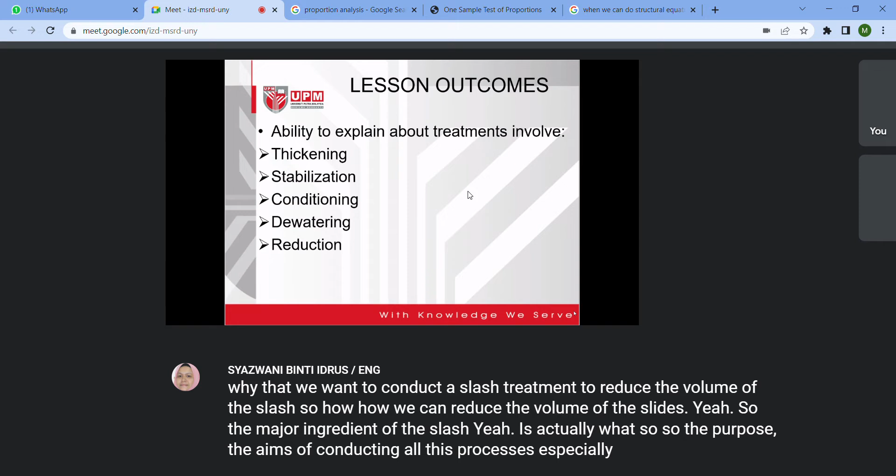So the spirit of conducting the sludge treatment is to reduce the volume of the sludge. That is the reason why we want to conduct a sludge treatment, to reduce the volume of the sludge. So how can we reduce the volume of the sludge? The major ingredient of the sludge is actually water. So the aims of conducting all these processes, especially thickening and dewatering, are to remove the moisture content, to remove water from the sludge, so that we can reduce the volume of the sludge.

Why do we need to reduce the volume of the sludge? As mentioned by Mr. Khairil during our visit, they have to pay for the sludge treatment. The water treatment operator has to pay for the sludge disposal. So that's why they would like to avoid producing a large volume of sludge. So to produce a very little amount of sludge, it has to go through a few processes. The major one and the first one is the thickening process.

Okay, let's watch the video. I think this is a very short video, and not really important because you have done your site visit, so you should be able to explain better regarding the sludge treatment.

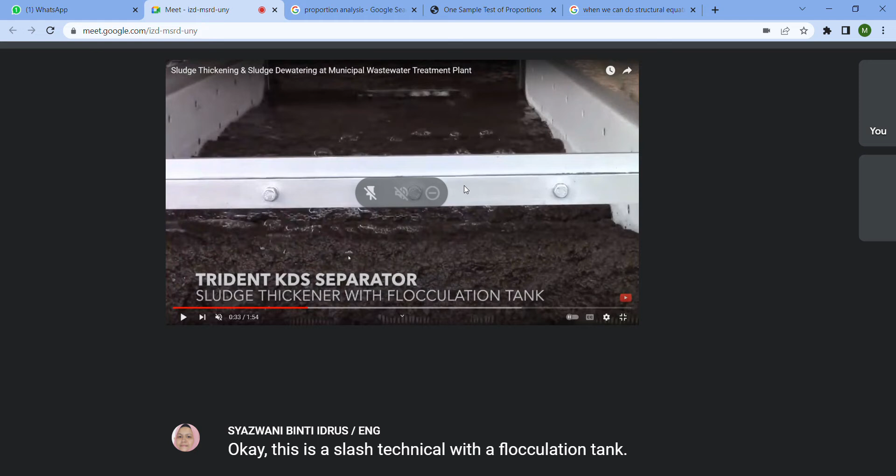Okay, this is a sludge thickener with a flocculation tank. So during sludge treatment, another set of polymer will be added. The polymer is a binding agent, to separate the sludge and water. It will bind the sludge.

Okay, this is after the dewatering process. So sludge which has been dewatered is known as sludge cake. So the major component of the sludge is definitely the solid from the waste, as well as the activated carbon, because activated carbon is a part of the treatment, and also the polymer which has been added

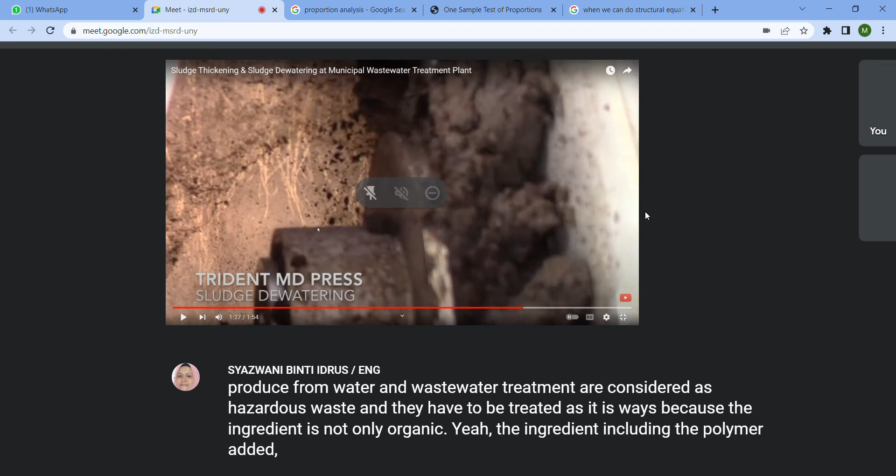earlier. So this is the reason why the sludge produced from water and wastewater treatment is considered as hazardous waste. They have to be treated as hazardous waste because the ingredient is not only organic. The ingredients include the polymer added as well as the activated carbon. Okay.

So the sludge cake is normally very low in terms of moisture content, very low in terms of volatile solid, and very high in terms of the total solid. Sorry.

No, the same one. You see? Not the same one. Different.

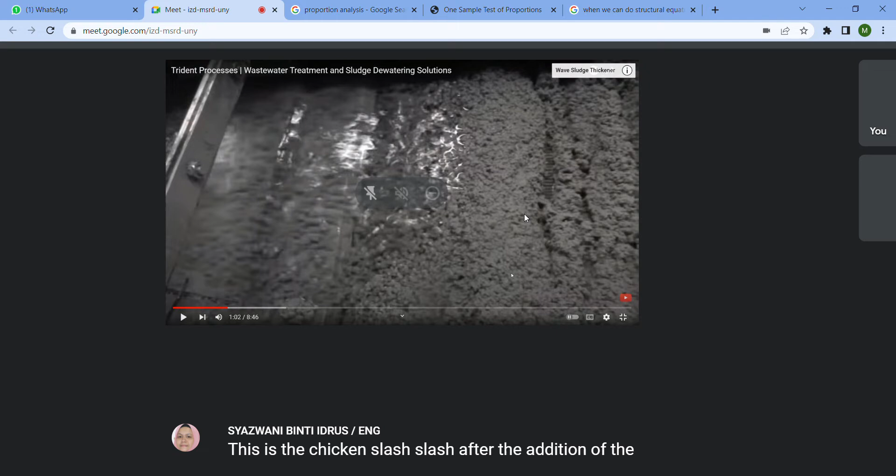Okay. This is the thickened sludge. Sludge after addition of the polymer, and now they are separated from water. Now they are discharging the dewatered sludge. The sludge has no longer, or very low, water level.

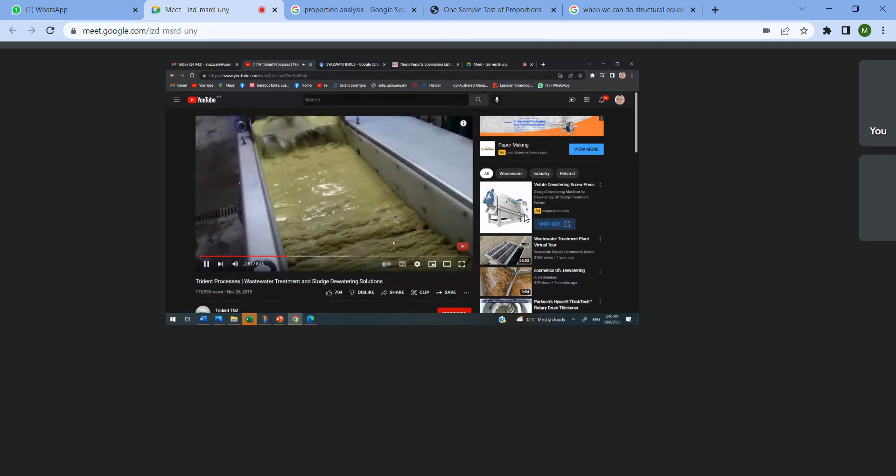So these are the addition. And these are the sludge cake. Yeah. I think in the water treatment plant that we visited last week, they do have this one. And we have this one after the sludge. For a water treatment plant, the production of sludge is not much, but if we are talking about a wastewater treatment plant, it is very significant.

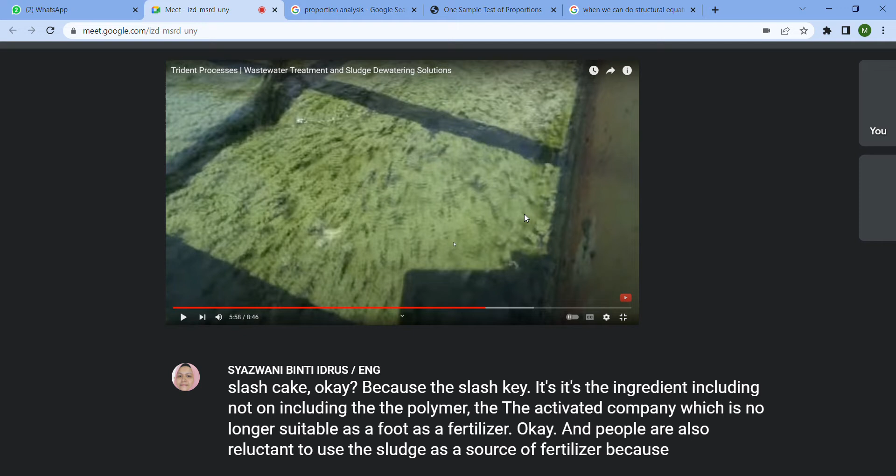Sometimes the wastewater treatment operators have no idea what to do with the sludge cake. Okay, because the sludge cake's ingredients include the polymer and the activated carbon, so it is no longer suitable as a fertilizer. And people are also reluctant to use the sludge as a source of fertilizer because it is human waste. So we can use it for non-crop plants, especially for gardening purposes, but not crop plants.

Right. Let's go to our lecture today. It's on sludge treatment, but a very quick one, because it's only a revision. So sludge treatment processes are concerned with separating the large amount of water. This is why this step is an extremely important stage. It starts with the thickening process, which is separating as much water as possible, whether by gravity or flotation. There are two methods. If by gravity, it works exactly like a sedimentation tank.

But if through flotation, it works exactly like dissolved air flotation, where we inject the air and it allows the sludge to float on the surface of the water. So exactly like the one that we saw during our visit, dissolved air flotation, where there is sludge which is stagnant on the surface of the water. That is known as the flotation method. If by gravity, the sludge will settle to the bottom part of the tank. This one is a very conventional system.

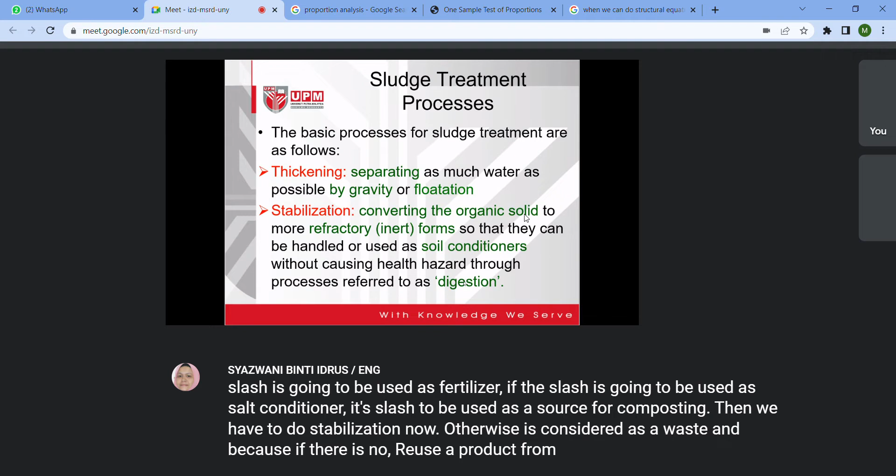Because if there is no reuse product from this treatment, which is the sludge itself, therefore there is no need to conduct the stabilization process, because this process is only required if we are to reuse the treated sludge. The stabilization process includes anaerobic digestion.

Okay, next one is conditioning. Conditioning is the addition of chemicals, including the polymer. This is another version of separating water and the sludge. Just now, if you go back to the first step, which is thickening, this is through mechanical as well as physical process, how the sludge can be separated from water.

And the third process is conditioning. This is where further separation will occur due to the addition of the polymer. Next is the dewatering process, separating water by subjecting the sludge to vacuum, pressure, or drying. And the final one is the reduction. It's converting the solid to a stable form by wet oxidation or incineration.

We don't have any of this. Normally after dewatering, the sludge is ready to be sent to the landfill. Okay, these are the steps that we have discussed earlier.

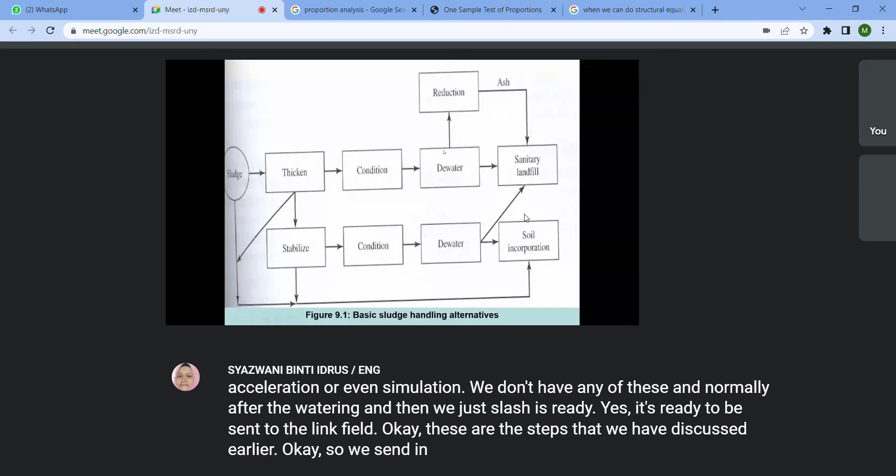So in this country, normally we send the sludge to the specific landfill which handles hazardous waste. So the cost will be paid by the water or wastewater treatment operator. If the cost is increased, then the consumer has to pay for the service. That's why they have been thinking of any technology that can reduce the sludge production.

What is actually the constituent of the sludge? First is the grit, which is the sand or the broken glass, the nuts, the bolts, and other dense material. This is from the grit chamber. Second one is the primary or raw sludge from the primary tank. Grit is from the preliminary tank. Okay. And next is secondary sludge.

So this is the major contributor to the sludge which has to be treated, because in a wastewater treatment plant we have waste activated sludge from the conventional activated sludge process. So these are the major contributors to the sludge production.

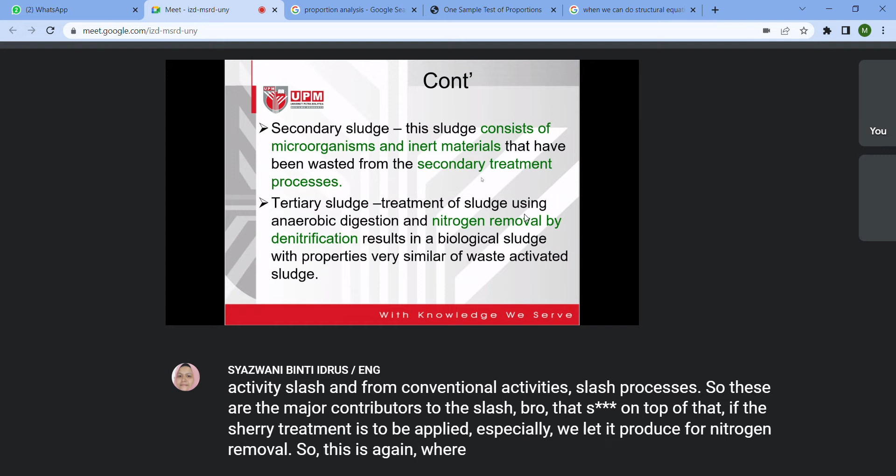On top of that, if tertiary treatment is to be applied, especially for nitrogen removal, this is again where sludge can be produced from the anaerobic digestion process, and different types of digesters will produce higher or lesser volumes of sludge. For example, if we employ the stirred tank reactor, it will produce a large volume of sludge. But if we employ the upflow anaerobic sludge blanket reactor, the sludge will be retained within the reactor, which reduces the sludge production from the system.

Okay, let's see. The thickening process is usually accomplished in two ways, through flotation or gravity. As I mentioned just now, the goal of this treatment is to remove as much water as possible before it goes through the next process. Basically, this is a low cost means of reducing the sludge volume, and it works very well.

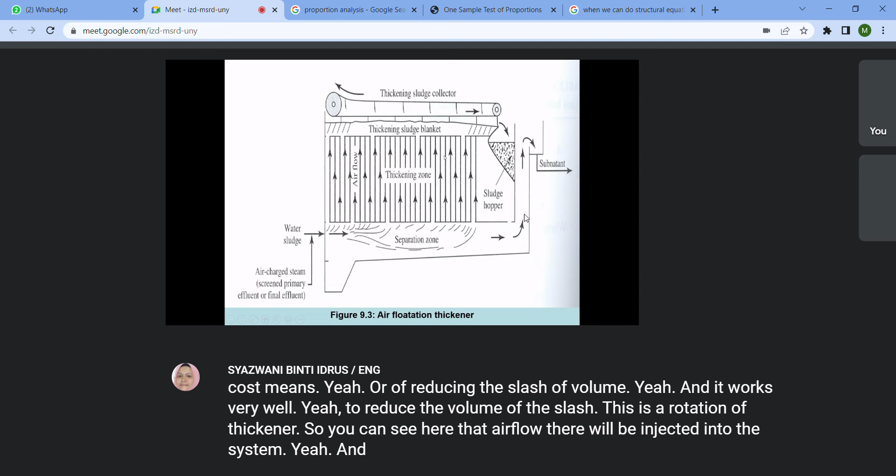This is an air flotation thickener. You can see here that the airflow is injected into the system, and the thickened sludge is collected on the surface of the system, the thickened sludge blanket. Normally we remove this using scrapers. This is exactly what we have seen before during the visit.

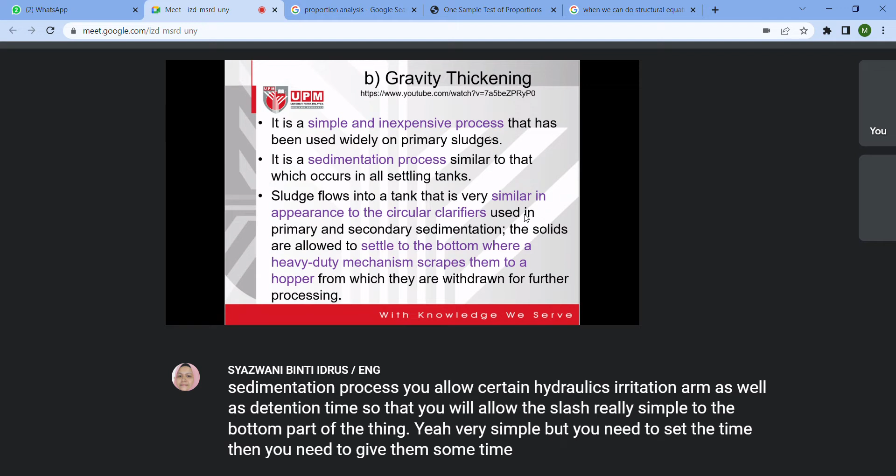Next is gravity thickening. This is a simple and inexpensive process. It uses the concept of the sedimentation process. You allow a certain hydraulic retention time as well as detention time, so that the sludge will settle to the bottom part of the tank. Very simple, but you need to set the time. You need to give it some time. Otherwise, the sludge will not settle properly to the bottom of the tank.

Okay. Next is the stabilization process. The principal purpose of sludge stabilization is to break down the organic solids biochemically. As I mentioned just now, stabilization is not very common in all water and wastewater treatment plants. Even though in this country we do have a few wastewater treatment plants that have a stabilization process, the one in Bunus, Wangsa, as well as the one in Lembah Pantai. The rest of the treatment plants send to the landfill, therefore no stabilization process is conducted. So the stabilization process can be conducted using two methods.

The first one is aerobic digestion, by injecting the air into the sludge, and the second one is anaerobic digestion, where they have a chamber without any oxygen inside. So this is the very common method for the sludge treatment, where they produce methane from the anaerobic digestion.

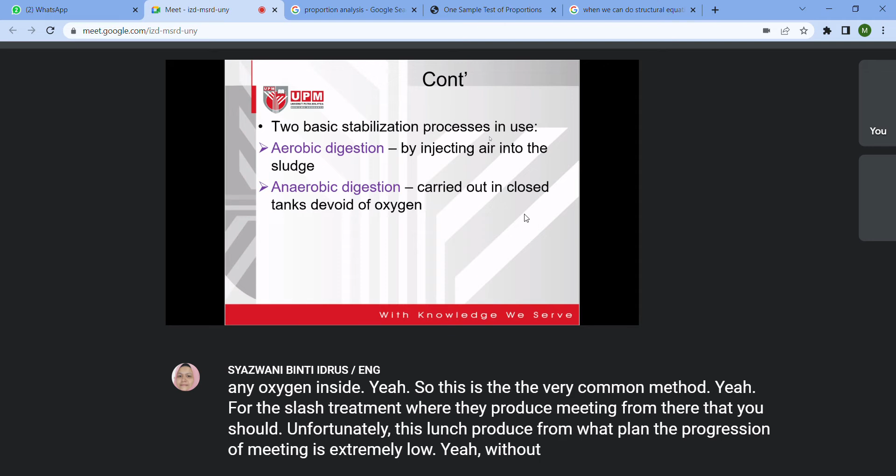Unfortunately, for the sludge produced from water and wastewater treatment plants, the production of methane is extremely low without any addition of other substrate. If we would like to promote more methane production, then we have to add other substrates, including food waste, because recently they have added food waste into the digester that contains the sludge from the wastewater treatment plant, to enhance the potential of the sludge cake produced, so that they can use the energy, because methane can be converted into electricity.

So basically, these are the standard rate for anaerobic digester. An anaerobic digester is a fully closed system without any oxygen. It requires airspace, supernatant, and at the bottom part normally will be the sludge. So employing this system, you will use a low amount of energy. However, you need to avoid any extreme loading rate. You have to control the volume of the sludge to be treated.

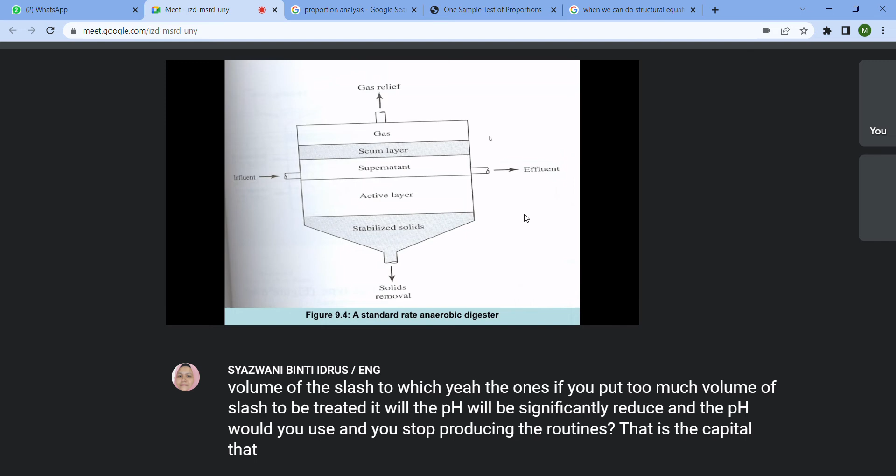Otherwise, if you put too much volume of sludge to be treated, the pH will be significantly reduced, and it will stop producing the methane. That is the indicator that the microbes within the tank are about to die. So once you reach a pH of 4, that is the sign of severe inhibition.

Okay. Sludge conditioning. Next, after stabilization is conditioning. This is where the polymer or the coagulants are added, including the PAC. The role of polyaluminum chloride is as a binding agent, so that it can clump all the sludge and separate it from water. So chemical coagulants act to clump the solids, so they can be easily separated from water.

On top of that, sludge conditioning can also be conducted using heat treatment, where the recommended temperature is a maximum of 230 degrees Celsius and a pressure of 2000. Definitely, we have to apply pressure, otherwise we cannot reach 230 degrees Celsius. Under this condition, water that is bound up in the solids is released. So this is another method to further improve the removal of moisture content.

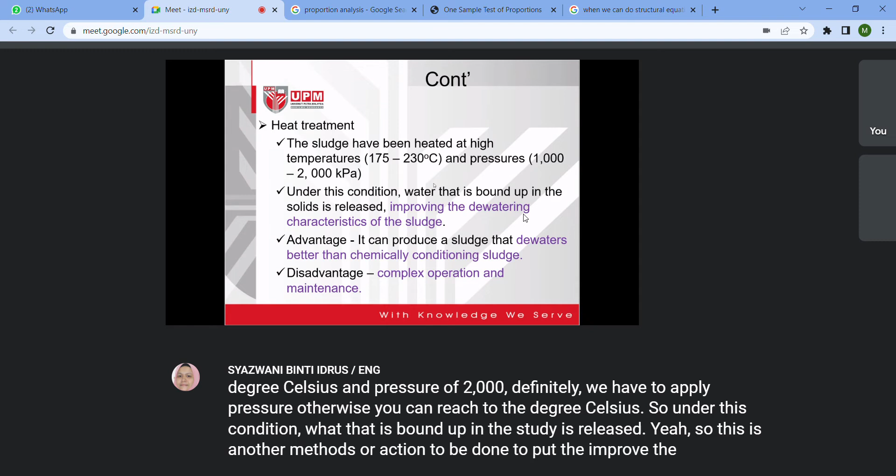Okay, the advantage is it can produce sludge that dewaters better than chemically conditioned sludge. So this is the option. The one that we normally practice in this country is sludge conditioning using chemical conditioning. On top of that, heat treatment can also be used as a conditioning process. The advantage is it can produce a sludge that dewaters better than chemically conditioned sludge, because we apply heat. The disadvantage is complex operation and maintenance.

Okay, next, sludge dewatering. There are three methods involved. The first one is the sludge drying bed. This is the one that we have seen before, and it is normally used by small plants because of the simplicity of operation and maintenance. It can be built without any provision for mechanical sludge removal and roof. So this is always selected as the dewatering method.

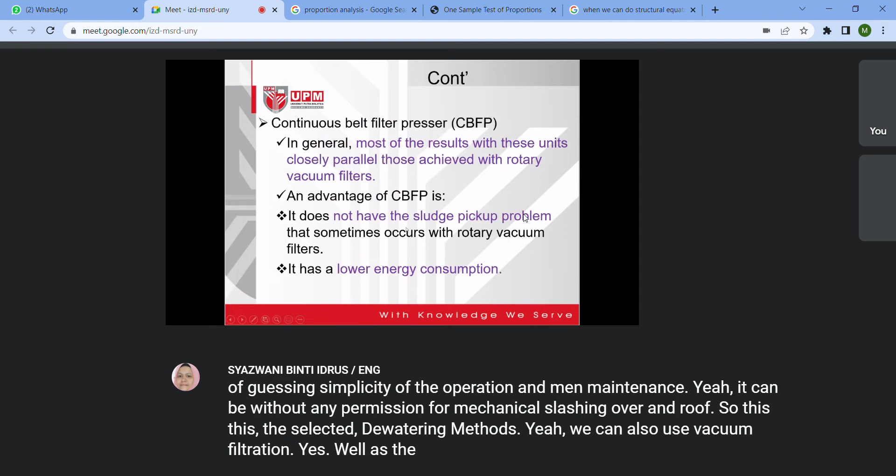On top of that, we can also use vacuum filtration, as well as the belt filter press. I think I do have one video that I can share with you regarding the belt press. Okay, belt filter press. Okay, watch one video on the belt filter press.

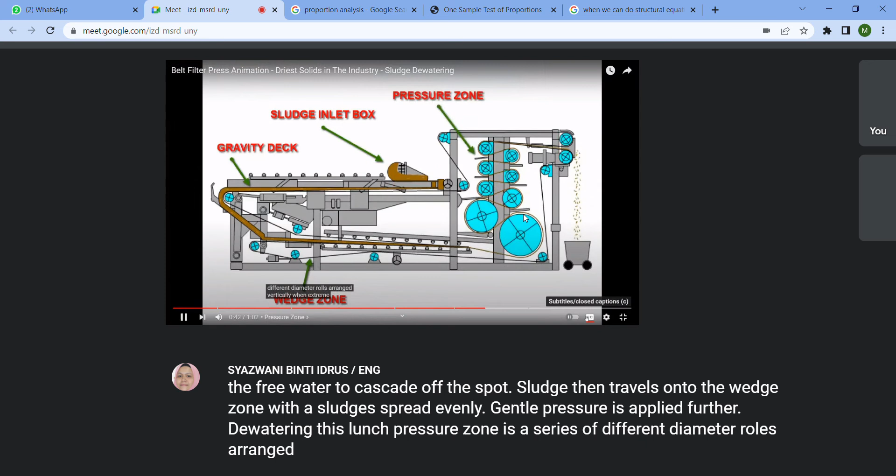Wet sludge enters the press through a sludge inlet box, where it is gently dispersed and spread evenly. Sludge is spread evenly along the gravity deck by a sludge leveling bar and passes through a series of plows, aligning the sludge into rows, allowing the free water to cascade off the sludge through the belt. Sludge then travels onto the wedge zone, where the sludge is spread evenly and gentle pressure is applied, further dewatering the sludge. The pressure zone is a series of different diameter rolls arranged vertically where extreme pressure is applied, allowing for maximum dewatering.

The belts are finally separated at the cake discharge zone, and scraper blades are used to remove the dried cake from the belts.

Okay, that is the belt filter press. The advantages are it does not have the sludge pickup problem and lower energy consumption. Next is the reduction process.

If sludge used as a soil conditioner is not practical, we use reduction. So if we have nothing to do with the sludge, we have no idea what product can be developed after the sludge treatment, then we can use incineration. But it's not common. Normally we send the treated sludge to the landfill.

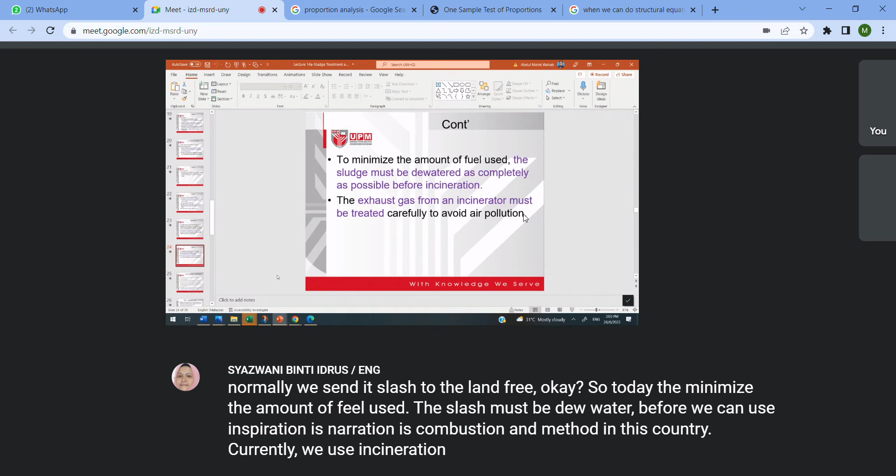So to minimize the amount of fuel used, the sludge must be dewatered before we can use it in the incineration. Incineration is a combustion method; in this country currently we use incineration if we are to deal with toxic waste or clinical waste, mostly the clinical waste.

So the thing with incineration is the system can completely turn any kind of waste into ash, because we are going to burn them at 1000 degrees Celsius. But there is another issue in preparing the waste before it can be burned in the incinerator. The major problem is to reduce the moisture content, otherwise it will not work well. It will not turn the waste into ash.

On top of that, most sludge contains high concentrations of sulfate and phosphate, all those negative ions. These negative ions can turn into acidic gas. So when they turn into acidic gas during combustion, it can cause corrosion to the incinerator itself. So this is another issue if we employ an incinerator.

Okay, sludge disposal, as we have seen before, twice a week or once a week, the lorry, the truck will come and pick up and send it to the landfill. These are the common methods. Okay, all right. Next, example one. We have three examples today. Example one, lecture 14.

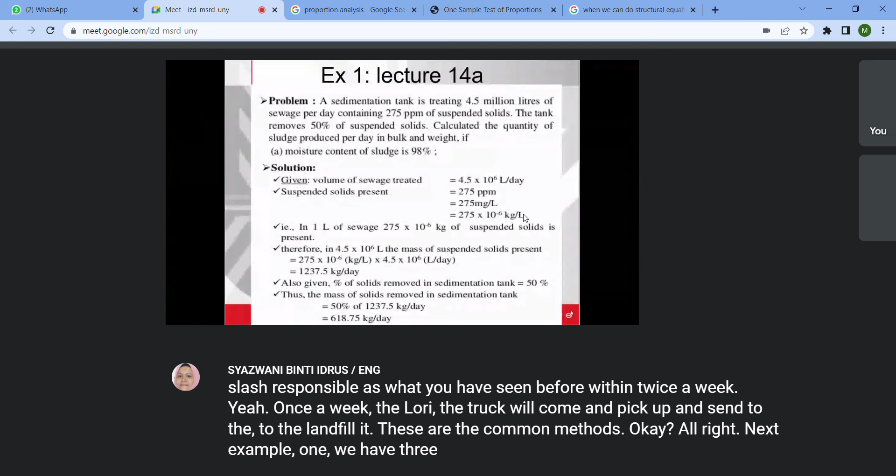A sedimentation tank is treating about 4.5 million liters of sewage per day, containing about 275 ppm of suspended solids. The tank removes 50% of the suspended solids. Calculate the quantity of the sludge produced per day in bulk and weight. You are given the information that the moisture content of the sludge is 98%.

The sludge itself, can you just imagine, 98% is water. If we are talking about 100 kg of sludge, 98 kg is water and only 2 kg is solid. That's why the treatment is extremely important, because this treatment can significantly reduce the volume of the produced sludge.

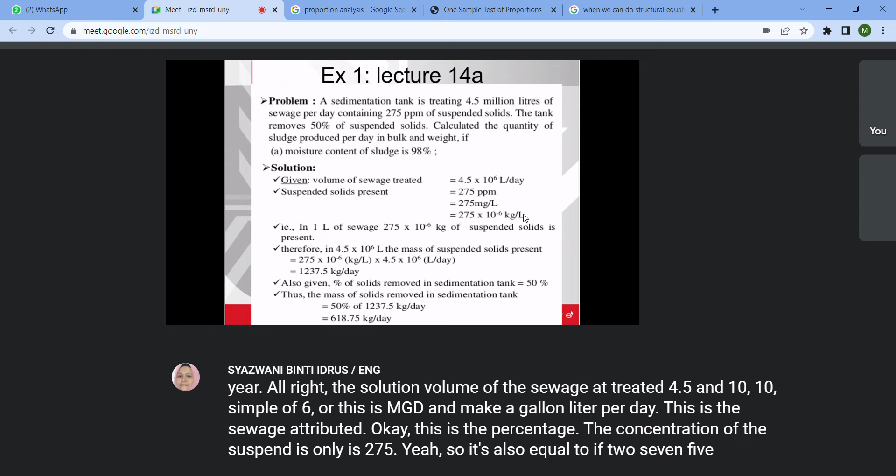Alright, the solution: volume of the sewage treated is 4.5 times 10 to the power of 6 liters per day, or megaliters per day. This is the sewage to be treated. The concentration of the suspended solids is 275 ppm, which equals 275 milligrams per liter, which is also equivalent to 275 times 10 to the power of minus 6

kilograms per liter. In 1 liter of sewage, 275 times 10 to the power of minus 6 kg of suspended solid is present. Therefore, we are treating about 4.5 megaliters of sewage. So we would like to know the suspended solid available in the sewage to be treated: 275 times 10 to the power of minus 6 times 4.5 times 10 to the power of 6, which is the sewage. And you will get 1237.5 kg per day.

This is the mass of the suspended solid available in the sewage to be treated, because the flow rate of the sewage is 4.5 megaliters per day. And you're also given the percentage of solids removed in the sedimentation tank. We know that sludge treatment is the final barrier. For this reason, we have to always consider a certain rate of removal.

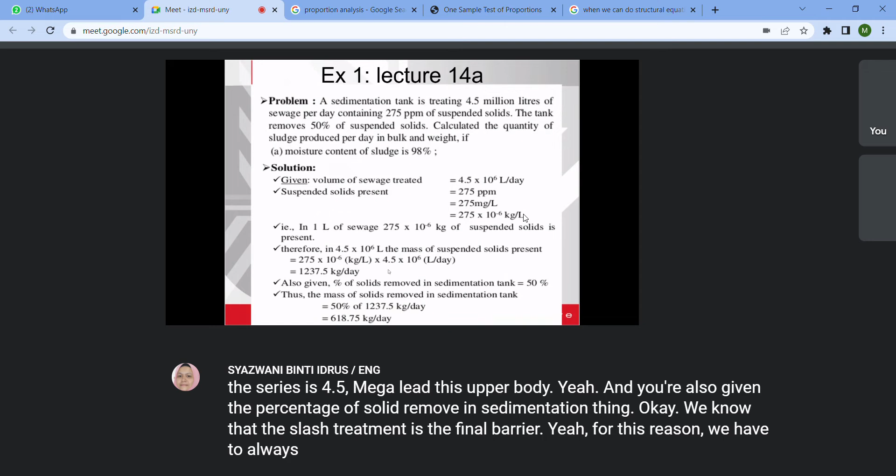So in this case, you were informed that the percentage of solid removal in the sedimentation tank is about 50%. So we know that the sludge required to be treated is only half of the suspended solid calculated earlier, in this case about 618 kg per day. You know that the moisture content of the sludge given to you is about 98%.

Okay, now we have to make some assumption. Let's use 100 kg because it's easier. Let's say that you have 100 kg of wet sludge, 100 kg of untreated sludge.

Wet sludge is untreated sludge, and the moisture content is 98%. For this reason, we can conclude that 2 kg of the sludge is solid, and 98 kg of the sludge is water, because the moisture content is about 98%.

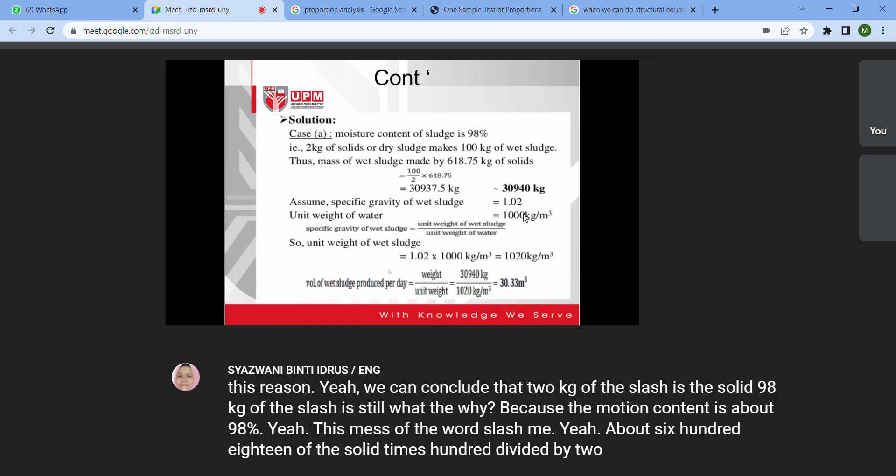This mass of wet sludge is calculated as the mass of solid, 618, times 100 divided by 2. This is used to calculate the mass of wet sludge.

Assume the specific gravity of the wet sludge equals 1.02, and the unit weight of water is always 1000 kg per meter cube. So you need to calculate the unit weight of the wet sludge.

Unit weight of the wet sludge equals the specific gravity of the wet sludge times the unit weight of water, in this case 1.02 times 1000. The 1.02 is the specific gravity of the wet sludge, or the untreated sludge. So the unit weight is 1020.

Then the volume of the wet sludge produced per day, you have to divide the weight by the unit weight. The mass, which is now the weight of the wet sludge, is about 30,900 divided by the unit weight, which is 1020 kg per meter cube, and you get the volume of the wet sludge produced per day, about 30 meter cube.

In the sludge digestion process, normally the indicators we have to monitor during sludge digestion include the pH, the biogas production, the volatile solid removal, the COD removal, as well as the alkalinity. These are the major indicators or parameters that can tell us the process performance.

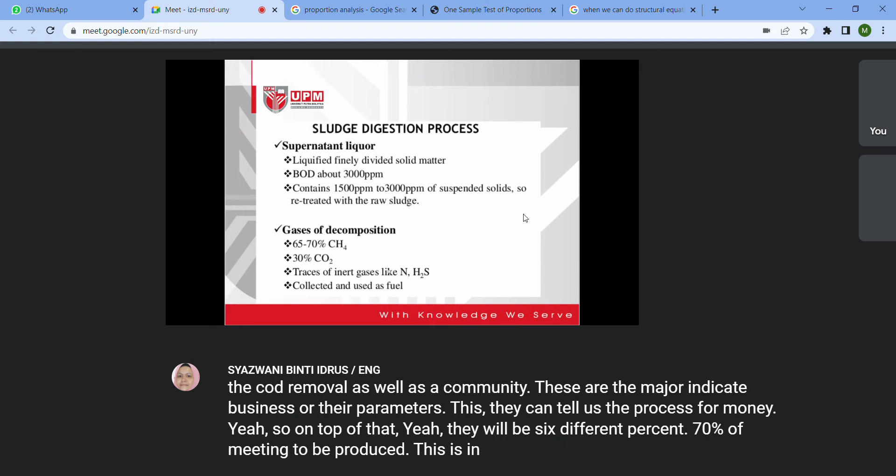On top of that, there will be 65% to 70% methane produced, in terms of composition. You can get the lowest of 50, but normally 62 is always the best number. Many studies have reported the percentage of methane produced from their system is about 62%.

There are two methods if you employ anaerobic digestion, two conditions. The first is known as thermophilic temperature, which is about 40 to 60. We can apply this method because it can produce higher biogas production.

Unfortunately, if your sample is very fragile in terms of acidification, for example like food waste, thermophilic might not be a good choice, because the system can inhibit very quickly and fail very quickly. So always use the mesophilic temperature, which is around 25 to 40. Normally we set around 35 to 38 degrees Celsius.

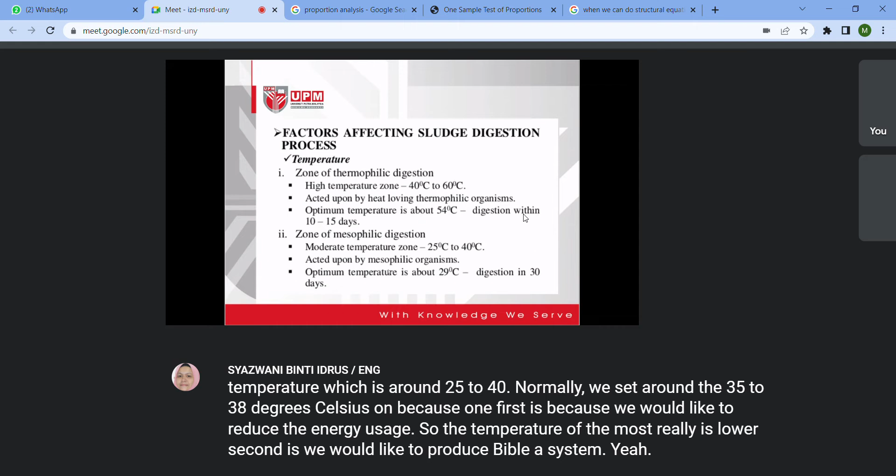Why? First, because we would like to reduce energy usage, so the temperature of mesophilic is lower. Second, we would like to produce a stable system. We are not aiming to produce very high biogas production only to end up having a failed reactor.

We have overloaded the system by putting too much waste, or a sudden admission of new types of waste. This causes a shock, as well as over-withdrawal of the digested sludge. Why is this related? Because in digested sludge, there is a certain population of microorganisms. If you take out so much sludge, you will end up having a system with a low population of microbes.

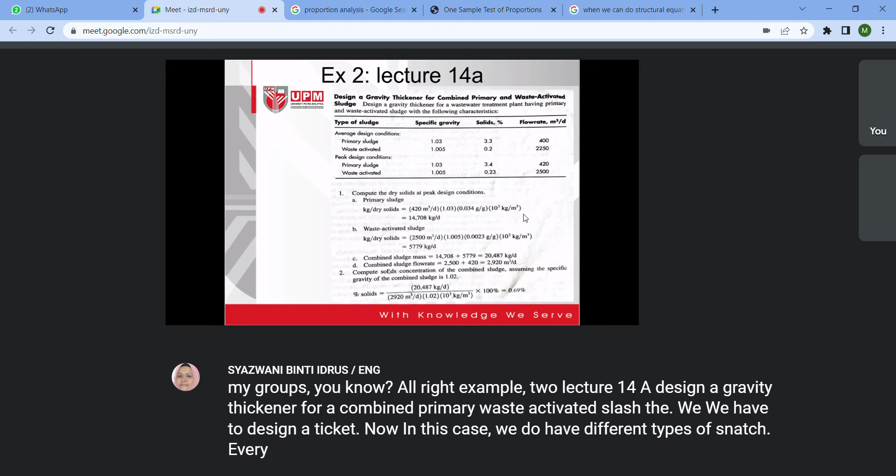Example 2, lecture 14A: design a gravity thickener for a combined primary and waste activated sludge. We are to design a thickener. In this case, we have different types of sludge—average design conditions for primary sludge and waste activated sludge. Primary sludge is from primary treatment, while waste activated sludge is processed from secondary treatment. The specific gravity is given, as well as the percentage of solid and the flow rate.

Compute the dry solid at peak design condition. Please bear in mind, in this case, we have to consider both peak design and average design.

It's not responding. The audio is not responding. Maybe I have to close it. Let me deactivate the hand tools.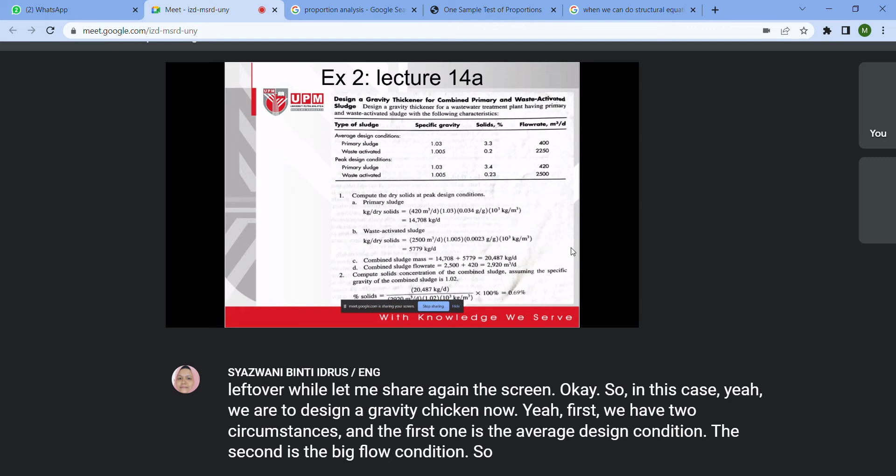Okay, so in this case, we are to design a gravity thickener. First, we have two circumstances: the average design condition and the peak flow condition. So compute the dry solid at peak design condition.

For the primary sludge, we know that the flow rate is 420, given in the final column. Then times with the specific gravity, times with the percentage of solid, then you will get kg per day. You will do the same for the waste activated sludge, and you will get the dry solid at peak design condition for both sludges, from waste activated from the secondary treatment as well as the primary treatment.

So combined sludge mass is equal to 14,708 plus 5,779, so you will get the sludge mass in kg. And combined sludge flow rate: the flow rate is given in the table, which is 2,500 plus 420.

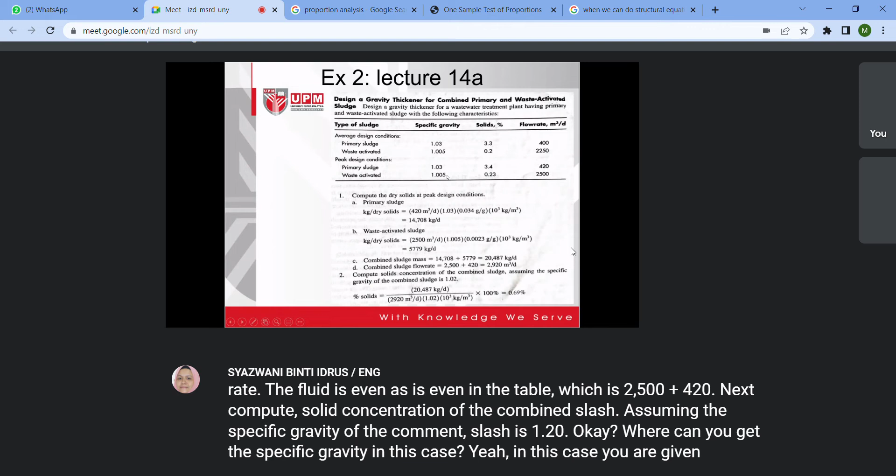Next, compute solid concentration of the combined sludge, assuming the specific gravity of the combined sludge is 1.02. Where can you get the specific gravity? In this case, you are given the specific gravity for the sludge.

For the primary sludge it is 1.03, and the waste activated sludge is 1.005. My recommendation is, if you are to calculate for the combined sludge, then get the average of these two values: 1.03 plus 1.005. So in this case, the combined sludge specific gravity is equal to 1.02.

So you can calculate the percentage of solid. In this case it is around 0.69. This was calculated earlier, this is the specific gravity of the combined sludge.

Next, compute the surface area based on the solid loading rate, because the solid concentration is between 0.5 and 1.5%. Select a solid loading rate of 50.

How to select this value and where to find it? You have to refer to Table 14-19. In this case, we are designing for waste activated sludge and primary sludge, so we are referring to the third row.

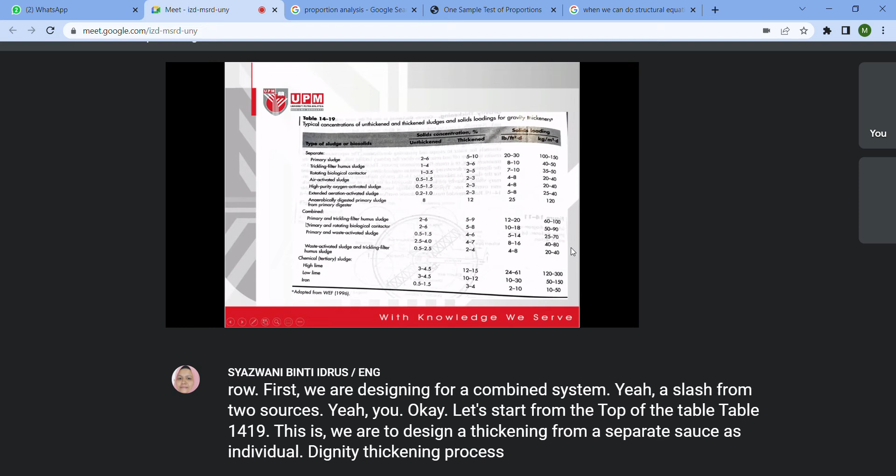First, we are designing for a combined system, a sludge from two sources. Let's start from the top of Table 1419. At the top, we design a thickener for a separate source as an individual thickening process. In our example today, we are referring to a combined system where we design a thickener for the treatment of sludge produced from primary as well as secondary treatment.

So in this case, you are referring to the third row. This is how we get the value of the solid loading. So in this case, the solid concentration is between 0.5 to 1.5.

Let's see the solid concentration. If you refer to the third row, the solid concentration is about 0.5 to 1.5, correct? And also the loading rate of 50 - the given value is between 25 to 70. So you decide which value to be used, as long as it's within this range, you will get the correct answer.

And then you can calculate the area. After calculating the area, you can compute the hydraulic loading rate, because you know the flow rate, already calculated earlier based on the flow rate given in the table. And then you can calculate the diameter.

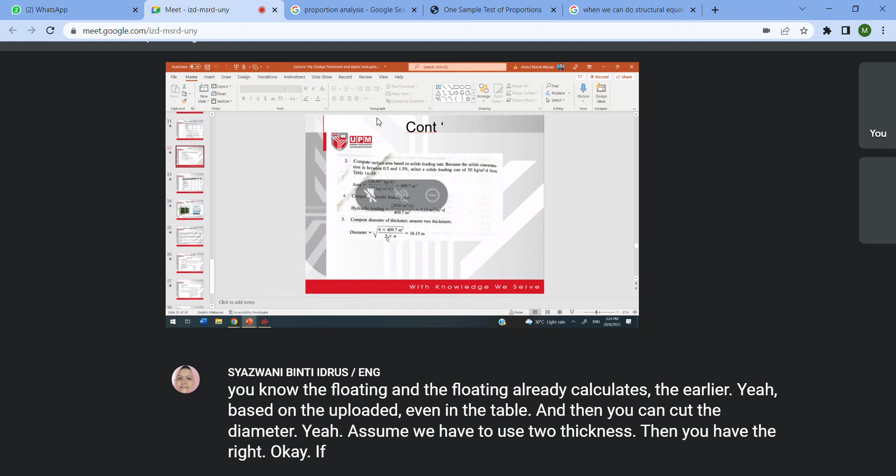Assume you have to use two thickeners, then you have to divide by 2. If the question instructs you to design for 2 thickeners, then divide by 2. If not, then only consider 1 thickener to be used.

Okay, the final part for this section is on septic tanks. There are 2 types of septic tank: first is the septic tank for the individual house, second is known as communal septic tank.

Especially in remote areas in this country, they used to have individual septic tanks. However, in urban areas, sometimes we do have residential areas where they use the communal septic tank, but this is for small numbers of residential units.

According to Malaysia standard, normally the city council and the sewerage department will only allow a maximum of 20 houses. If they submit the application to get permission to develop the communal septic tank, the developer and contractor, then the city council as well as the sewerage department will grant the permission if the house count is 20 or less, then they can use a communal septic tank.

For this reason, the black water will not be discharged into or treated in a sewerage treatment plant. It will be treated nearby using a communal septic tank located within the residential area, for a maximum of 20 houses. But in other countries, sometimes they allow a maximum of 30 houses.

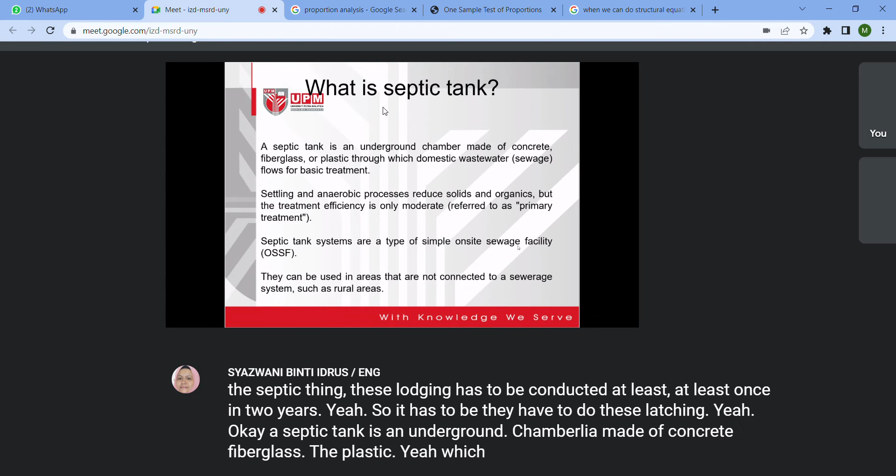A septic tank is an underground chamber made of concrete, fiberglass, or plastic, through which domestic wastewater flows for basic treatment. So this is mainly on domestic wastewater.

So septic tank systems are a type of simple on-site sewage facility, and they can be used in areas which are not connected to a sewerage system, especially rural areas.

The final example for lecture 14A is on septic tank design. Design the dimensions of a septic tank for a small colony of 150 persons. Okay, this is 150 population.

Let's imagine that we have 5 persons for each house. That indicates that we are going to design for 30 houses, where the water supply from the municipal head works at the rate of 120 liters per capita per day.

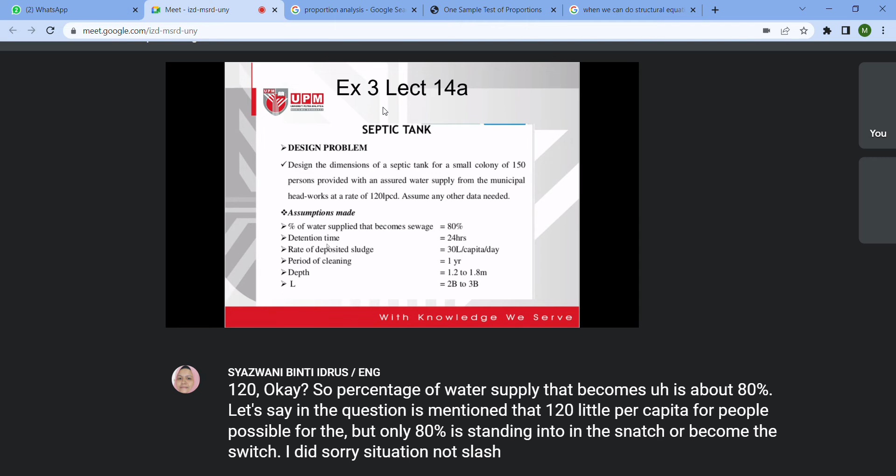Sorry, sewage, not sludge, because in this question there are two different terms: first is sewage, second is sludge. What is the difference between these two terms? Sewage is the wastewater. Now in the question it's mentioned that the wastewater produced per person per day is 120, and only 80% out of the wastewater produced turns into sewage.

Okay, so another one we have is rate of deposited sludge. Deposited sludge means the product of the waste which has been treated. In this case it's about 30 liters per capita per day. So sludge is referred to as the inert matters that are produced during the biological process, not fresh wastewater.

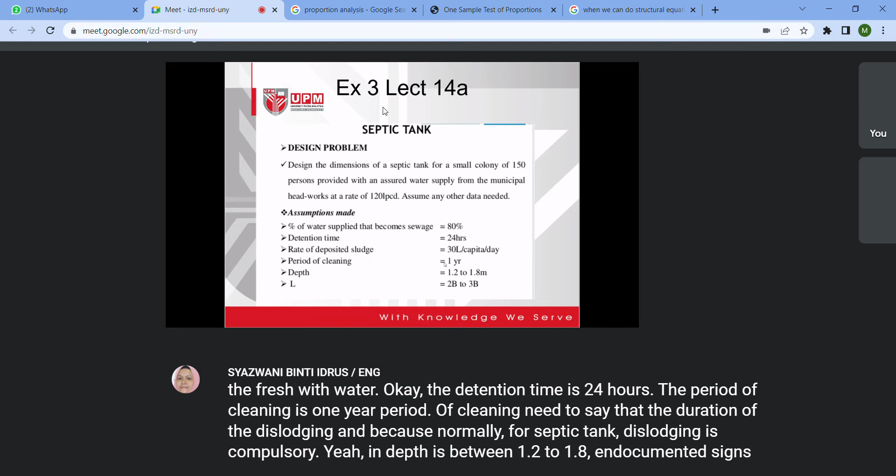Okay, the detention time is 24 hours. The period of cleaning is 1 year. Period of cleaning means the duration between desludging, which is compulsory for septic tanks. The depth is between 1.2 to 1.8, and the recommended size is 2B to 3B, where length equals 2B or 3B.

Next, the quantity of water supplied equals the per capita rate times the population, as mentioned, 120 per capita per day times 150. 150 is actually the population, not liter per day - liter per day is supposed to go here. But the final value here is correct.

The quantity of sewage produced, because only 80% turns into sewage, so 80% times 18,000. The quantity of sewage produced during the detention period - since the detention period is only 24 hours - gives you the volume: 14,400 liters per day. So you would like to know how much in terms of volume is produced, then you multiply with the detention time. Per day, basically it's about 14,400 liters of sewage to be treated within the period of 24 hours.

Okay, so for the solution, the volume of sludge deposited: the rate of sludge deposition is given as 30 liters per capita per day. As I mentioned, sludge is the product, the inert matters or inert material that is produced during the biological process.

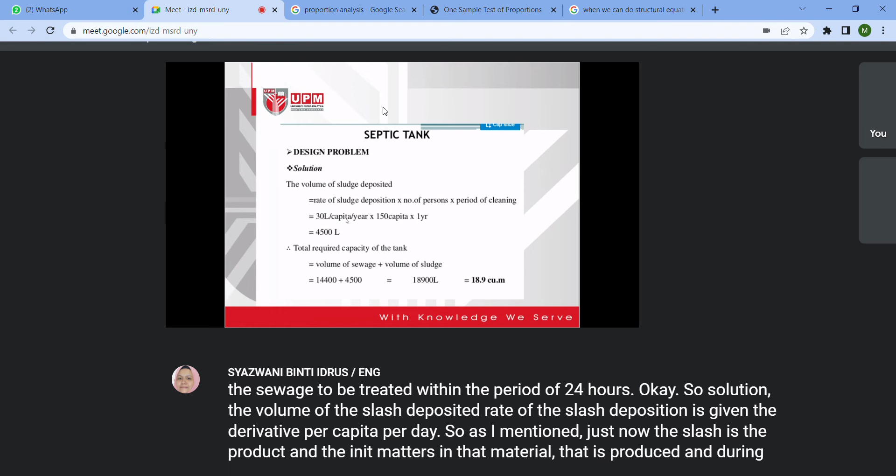So, times number of persons and times the period of cleaning, so you will get the volume of sludge deposited. The total required capacity of the tank is the volume of the sewage, which is 14,400, plus the deposited sludge. We have to consider the deposited sludge. So overall, the required capacity of the tank is about 18,900 liters, which is equivalent to 18.9 cubic meters.

Okay. Take the depth of the tank. Earlier you were given the range, so you can choose 1.5 meters. The surface area of the tank is equal to 18.9 cubic meters divided by 1.5, so this one is the area. Take the length to width ratio equal to 3 to 1. So the length times the width is equal to 12.6, because this is the area.

So that you solve. I think this one you should have no problem solving, because L equals 3B. So 3B times B equals 12.6, so you can get the value of B equal to 2.05 and L equal to 6 meters. Please let me know if you have no idea how we can reach this value, because this is the common design calculation. Earlier you were given in the question that this is the recommended ratio to be used.

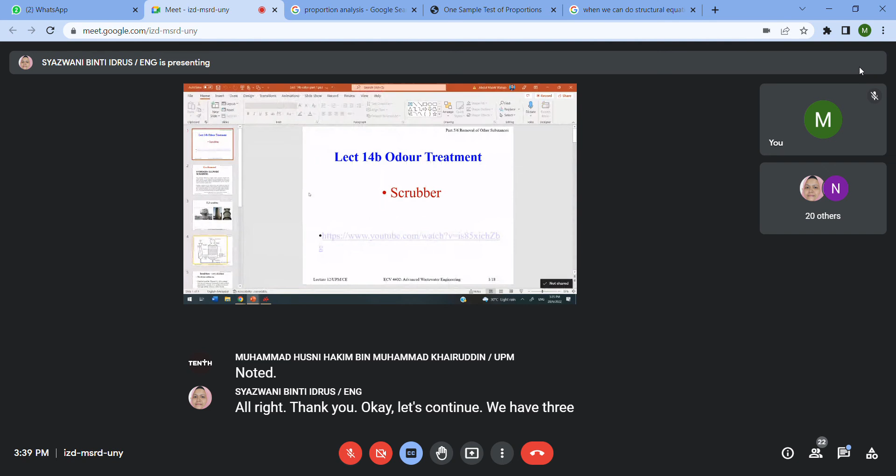Okay, let's continue. We have 3 lectures today. Let's continue to the second part of the lecture on odor treatment. These are the gases produced in a water or wastewater treatment plant which require treatment. So we are going to design a scrubber unit today. These equipment are very popular not only in water or wastewater treatment for odor control, but also as air pollution treatment devices. Scrubber. Okay. Let's watch one short video.

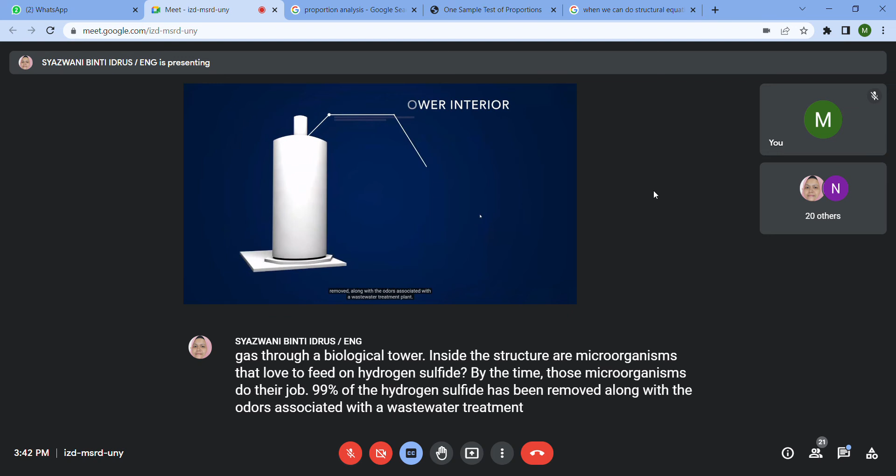Approximately 200 covers were installed. That's a total of 7,000 square feet. While those covers prevent the gas from being released, that hydrogen sulfide still needs somewhere to go. That's when we allow Mother Nature to step in and do her job. About 400 linear feet of ductwork installed within the covered tanks and channels blows the gas through a biological tower. Inside the structure are microorganisms that love to feed on hydrogen sulfide. By the time those microorganisms do their job, 99% of the hydrogen sulfide has been removed, along with the odors associated with a wastewater treatment plant. This improvement project was a major investment into the community by BPUB, with project costs reaching $2.1 million. The project was done with a great deal of help and support from the city of Brownsville, notably from the commissioner of this area, Ricardo Longoria Jr., who wanted to make sure that the needs of his constituents were being met.

I've been living here in the neighborhood since 1973, and the plant's been around since about 1955. Every time that you came to our neighborhood, when you would drive down, you would always get the smell of raw sewage when it was coming in.

So I've been in office now since 2003. That makes about 13 years. And I got together with our CEO from PUB, Mr. John Bruciak, and a couple of members of the board since back then. And we've tried several things to be able to control the scent, to control the odor. And it wasn't until about 2 years ago that we tasked Ambiotech Engineering to come up with a plan. And it's basically what you see behind you right now.

And this is an odor control system that's been set in. And it's also at our Robindale plant here in Brownsville. This facility can work up to 12.7 million gallons a day. Right now, it works at about 5.6, so we're not even halfway.

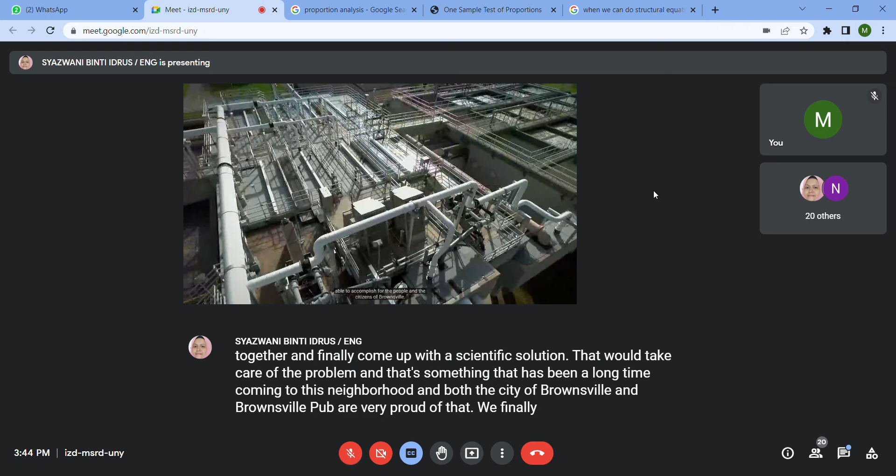So this is something that's been a long time coming. We were finally able to get together and finally come up with a scientific solution that would take care of the problem. And that's something that has been a long time coming to this neighborhood, and both the city of Brownsville and Brownsville PUB are very proud that we finally have been able to accomplish this for the people and for the citizens of Brownsville. And now that the work is complete, Commissioner Longoria says that the difference is clear.

Everybody stands to benefit. Everybody stands to win. The city of Brownsville owns 81 acres across the street. As you look at the future of Brownsville, we're always ahead. We're always planning 10, 15, 20 years ahead. As you look into the future, you see a possibility of maybe the university expanding here into the neighborhood.

And of course, by us having taken care of this problem right now, you start preparing for the future. You start making it a more viable community. You start making it so more viable projects would be able to come into the area. So preparation is key. Having done this right now prepares future commissions, future boards, to be able to give them that accessibility to our area, making it more viable.

As a municipally owned utility, PUB always puts the needs of its customers first. And this project shows the importance of having a utility motivated toward meeting customer requests, as well as one that's here to work alongside the city to accomplish that goal.

Okay. A very well planned project for odor control. Otherwise, the community will not be happy, especially when we are dealing with hydrogen sulfide. This is a very annoying gas because it smells like a rotten egg. It's not like methane. Methane is an odorless gas.

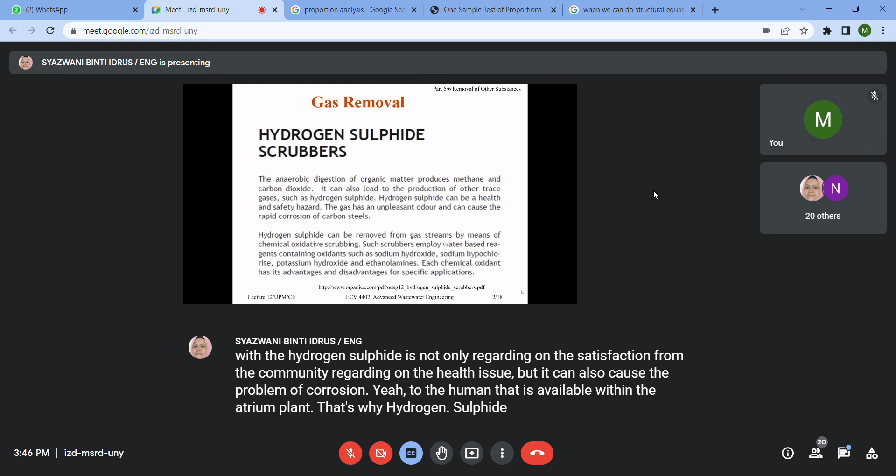That's why hydrogen sulfide requires a specific treatment so that we can reduce the effect. We can minimize the risk. So the oxidants, the chemicals that normally we use for the treatment of hydrogen sulfide, include sodium hydroxide as well as sodium hypochlorite.

They spray the chemicals onto the packed bed where the odorous gas will pass through from the bottom part of the system. The odorous gas, including the hydrogen sulfide, passes through from the bottom of the system. It's an upflow system, because it pumps from the bottom, so that it will pass through the packed bed, where the chemicals are already available.

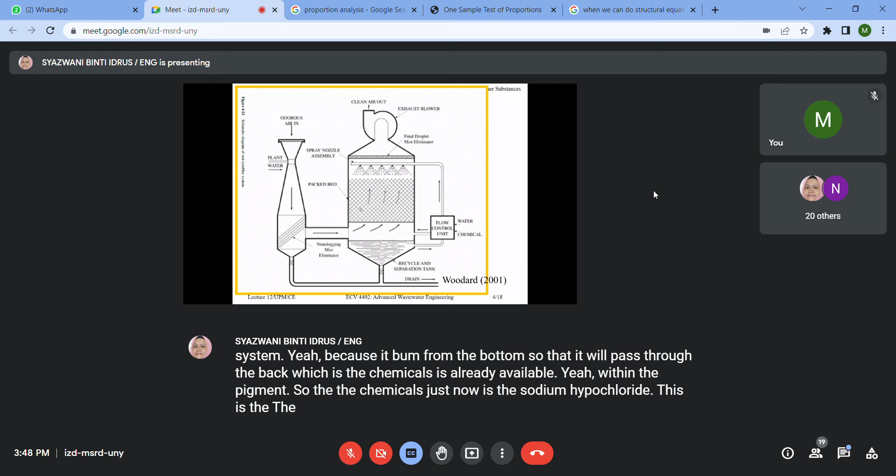So the chemical just now is the sodium hypochlorite. This is the oxidant that they use to treat the hydrogen sulfide, so that it will be doing the treatment process within the fixed bed or the packed bed, and it will release the clean air from the system. Okay, so this is the first cross section of the chemical scrubber.

Okay. So the chemical scrubber's purpose is to allow contact between air, water and chemicals. So sodium hypochlorite. On top of that, it can be used to remove also ammonia as well as sulfur dioxide. So these are the three major odor gases that are produced from wastewater treatment systems, especially during sludge treatment.

Next one is the biological scrubber or bio-trickling filter. This is the one that we have in Bandar Tun Razak wastewater treatment plant. The worst case, because I would say that if we are to choose between the chemical scrubber and biological scrubber, I will go for the chemical scrubber,

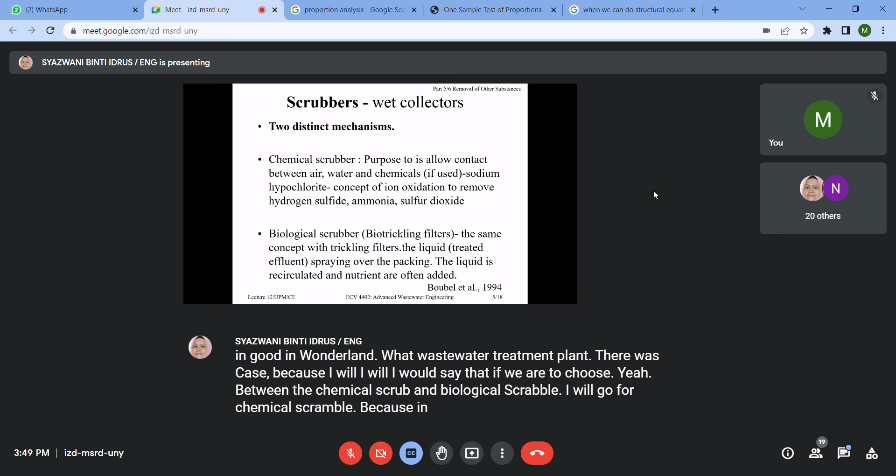because the biological scrubber is the same configuration. We still have the filter media, but we have to always spray the nutrient, because we culture the microbes within the media, so that the microbes will be doing the treatment to treat the hydrogen sulfide. It's not easy because we have to always monitor the pH condition, because we are dealing with living organisms. That's why I said I would go for the chemical scrubber, if we have to choose.

Okay, so there are two mechanisms involved. Later I will share with you the schematic diagram for the biological scrubber. There are two major mechanisms involved during the treatment process. First is known as impaction. Second is known as diffusion. Okay, figure 1 is the impaction. It involves the water droplet and also the gas streamline.

The second is, in a wet scrubbing system, dust particles will tend to follow the streamline of the exhaust stream. So this is known as impaction. But when it doesn't follow the streamline, it is known as diffusion. The movement is known as diffusion. It's an irregular motion.

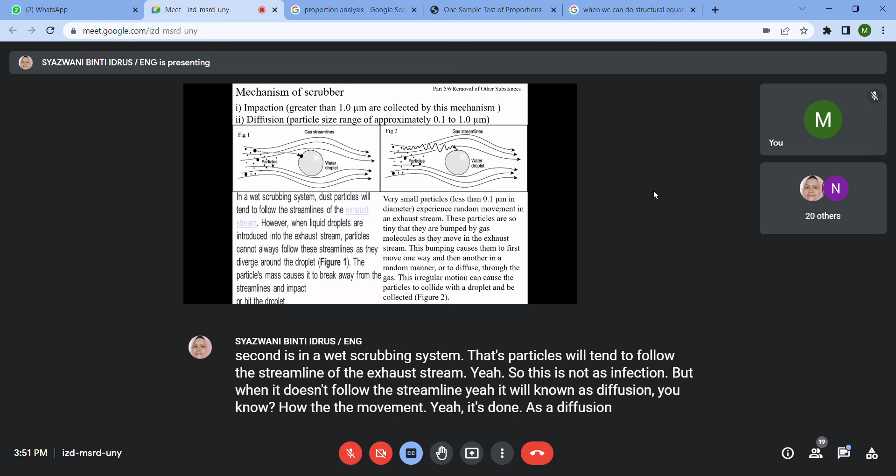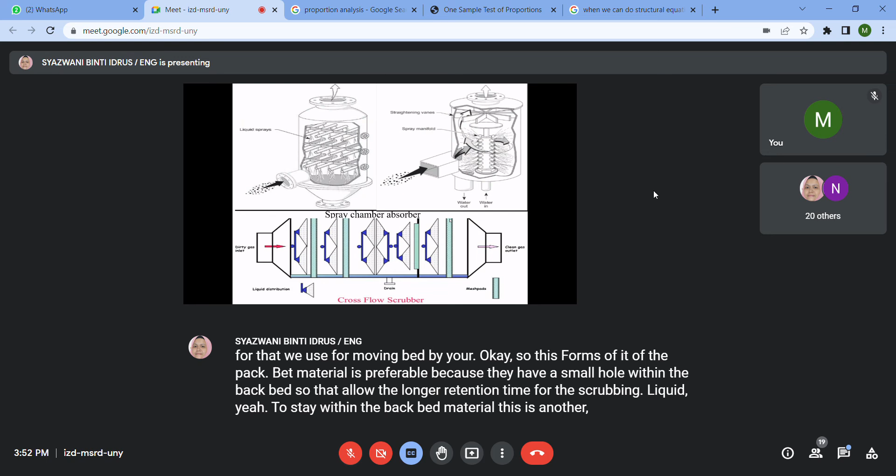Okay, this is another configuration. This is gas in. This is the liquid spray, the sodium hypochlorite. This is the clean gas out. Another configuration is the gas to be treated, and how they spray the sodium hypochlorite. And the bottom one is known as a cross flow scrubber. In the cross flow scrubber, we have the dirty gas inlet, liquid distribution, drain, and the clean gas outlet. Within the cross flow scrubber, the chemicals will be injected.

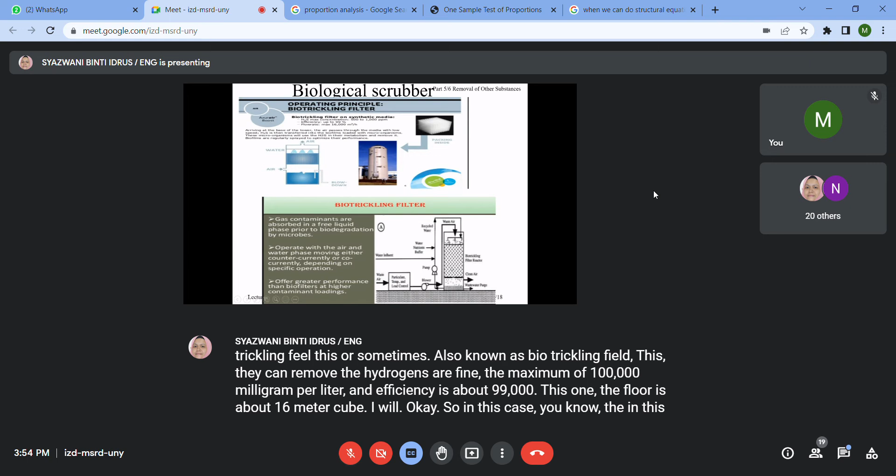Okay, so in these bio-trickling filters, they will culture the microbes, and there will be an inlet for the operator to inject the nutrient. You have to inject the food for the microbes. At the same time, the gas comes in, and it will be doing the treatment.

So the concept here, the major difference between the chemical scrubber and biological scrubber, is what we splash on the top part of the system. For a biological scrubber, we splash the nutrient onto the bio-trickling media, because we have microbes living within the media and the nutrient is a source of food. For the chemical scrubber, we have to splash the sodium hypochlorite. But this system offers greater performance than a biofilter at higher contaminant loading. Okay, right, that's all. Let's go to the calculation.

Okay, design for odor control in a wastewater treatment plant. Before we can start with the design, we have to step back a little bit to check again your understanding on chemistry, form 4 chemistry. But okay, first, the selection and design of odor control facilities.

So how do we select and determine the characteristics and the volume of the gas to be treated? These are the steps to be taken. We have to characterize the gas to be treated, because for different gases to be treated, you will have to provide different sizes of scrubber. Define the exhaust requirement, evaluate the climatic and atmospheric conditions. When you are dealing with gas, you have to deal with the pressure and the temperature. So you have to know what the standard temperature and pressure is.

Select one or more odor control treatments to be evaluated. Normally they will start with the pilot scale, and they will perform the life cycle analysis, especially if you are to design a large scale system. All right, so let's see the gas law. Now we have to do a very short revision here on the gas law.

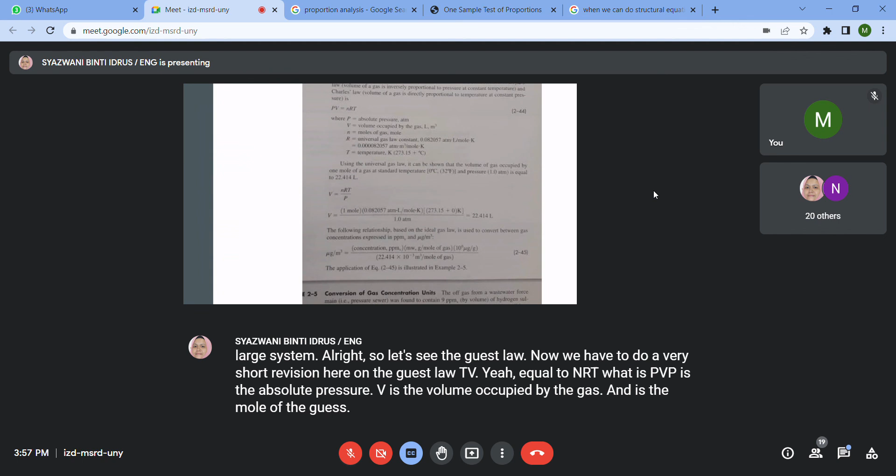PV equals nRT. What is PV? P is the absolute pressure, V is the volume occupied by the gas, n is the moles of the gas, R is the universal gas law constant, which is equal to 0.082, and if we use this equation, T has to be expressed in the unit of Kelvin. Our temperature is normally expressed in Celsius, so it's very easy to convert to Kelvin, just plus 273.15.

All right. From the universal gas law, it can be shown that the volume occupied by 1 mole of gas at STP, which is assumed to be 0 degrees Celsius and a pressure of 1 atmosphere, is equal to 22.414 liters. Okay, how can we reach this value?

There is a calculation where n is equal to 1 mole, R is the universal gas law constant, T is 273.15 plus 0. Why 0? Because in this case we take standard temperature and pressure, where it is 0 degrees Celsius, divided by 1 atmosphere, because this is at standard condition, so you will get 22.414.

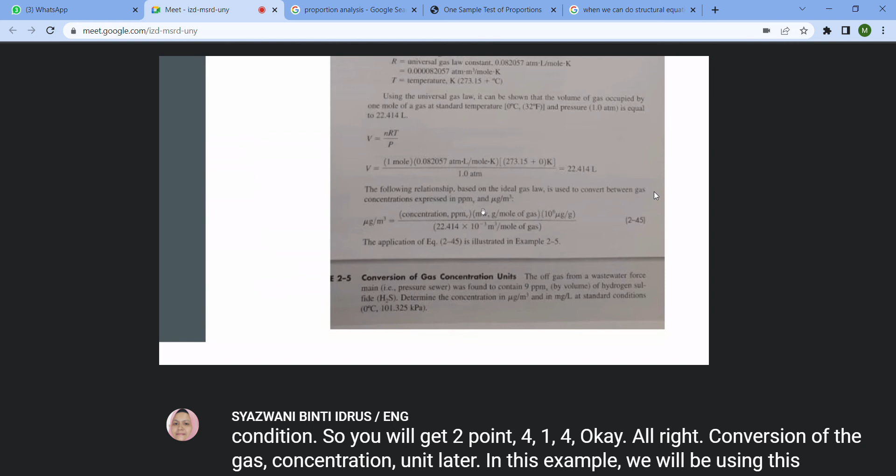Okay, all right. Conversion of the gas concentration unit. Later in this example, we will be using this equation. This is to convert between gas concentration expressed in ppm and microgram per meter cube.

The gas from wastewater was found to contain about 9 ppm by volume of hydrogen sulfide. Determine the concentration in microgram per meter cube and in milligram per liter at standard condition. Standard condition means 0 degrees Celsius at 101.325 kPa. This is at STP. The solution: compute the concentration using equation 2-45.

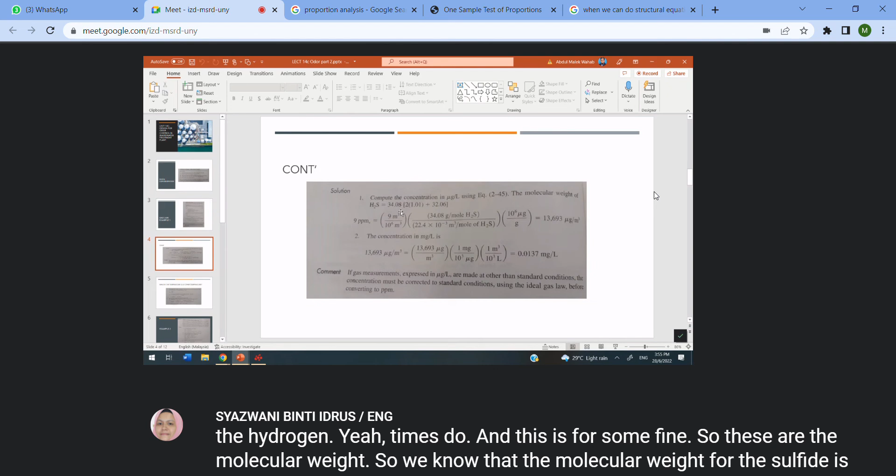So first, the molecular weight of hydrogen sulfide is 34.08. These are the atomic values for the hydrogen, times 2, and this is for sulfur. So we know the molecular weight of hydrogen sulfide is 34.08. This is a fixed value, and we are dealing with only 3 types of gases: hydrogen sulfide, ammonia, and sulfur dioxide.

So in case this question comes up in your final exam, I'm not sure yet because the question is not ready yet, maybe I will provide the periodic table. You need a periodic table to calculate the molecular weight in case it comes out in the final exam. But not sure yet because the question is not yet prepared.

Okay, so 9 ppm. It's stated in the question that the concentration of the hydrogen sulfide is equal to 9 ppm.

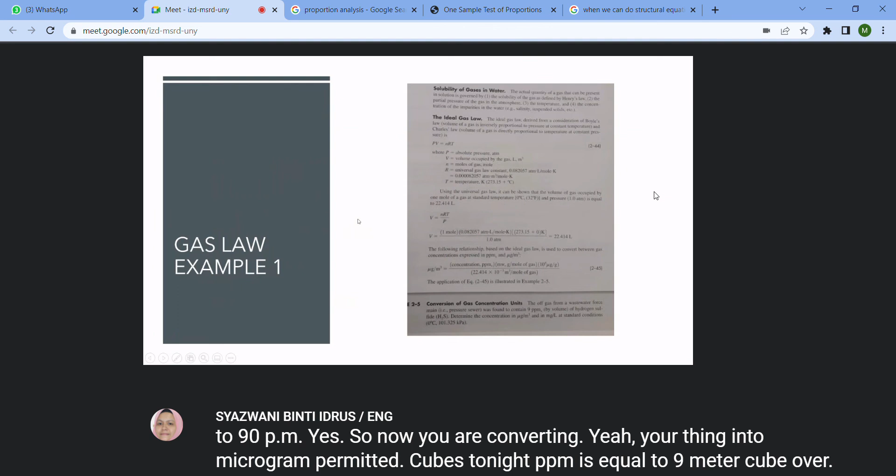So now you are converting into microgram per meter cube. So 9 ppm is equal to 9 meter cube over 10 to the power of 6 meter cube, times the molecular weight divided by the volume of gas at standard temperature, just now, 22.4 liters. Just to recap, 22.4; this is only the unit conversion. So you will get 13,693 microgram per meter cube.

So in milligram per liter from ppm, if you are dealing with liquid it's easy, you know why? Especially seawater, surface water, groundwater, wastewater, because 9 ppm is always equal to 9 milligram per liter. This is due to the density of water, because it's equal to 1000. But if we are talking about gas, it's no longer the same. So this is the step where we can convert from ppm to milligram per liter.

Okay, so 13,693 microgram per meter cube. This is the conversion. Then you will get it in milligram per liter. You see the difference. 9 ppm is equal to 0.0137 milligram per liter. It's no longer the same.

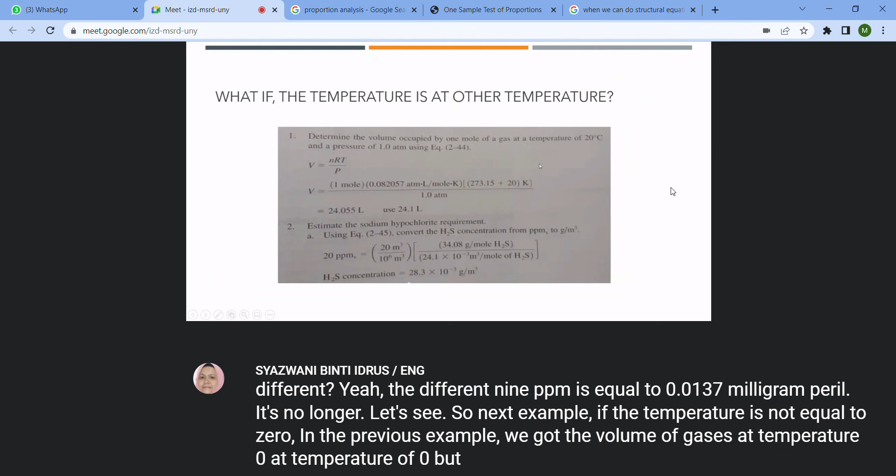Okay. So next example, if the temperature is not equal to 0. In the previous example, we got the volume of gases at temperature of 0. But let's see if the temperature is not at 0 degrees Celsius, let's say in this question equal to 20 degrees Celsius. We still have to use the same equation, but in this case, to convert to Kelvin, 273.15 plus 20. In the previous example, plus 0.

Okay, so you will get the new volume for the gas to be occupied at 1 atmosphere, because just now it was 22 at 0 degrees Celsius, but when it turned to 20 degrees Celsius, the volume increased to 24 liters. Estimate the sodium hypochlorite requirement. So in this case, the hydrogen sulfide concentration is 20 ppm. So you have to follow exactly the same steps. But here, since it's at a different temperature, do not use 22. You have to use 24.

So convert the hydrogen sulfide concentration from ppm to gram per meter cube. So this is in gram per meter cube. And if you are to convert from ppm to milligram per liter, you can simply follow the following steps. But the only difference here is the volume of the gas occupied, because this is at 20 degrees Celsius.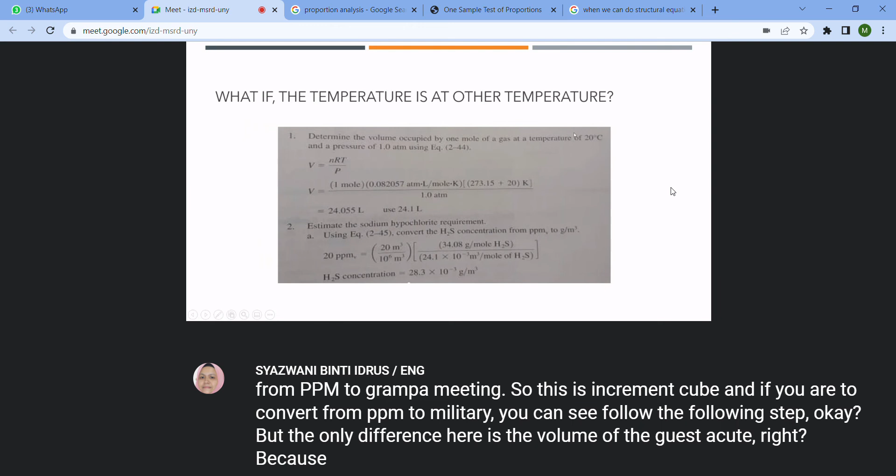Okay, let's go for our design question, which is the final example for today. Determine the size of compost biofilter needed to scrub the air from a 100 meter cube enclosed volume using the design criteria in table 15.14. The table is here. Also estimate the mass of the buffer compound needed to neutralize the acid formed as a result of treatment within the filter. Assume 12 air changes per hour are needed, and assume a bed porosity of 40%. Will the volume selected be adequate if the air contains 40 ppm of hydrogen sulfide in addition to other odorous constituents? So this is what we need to check.

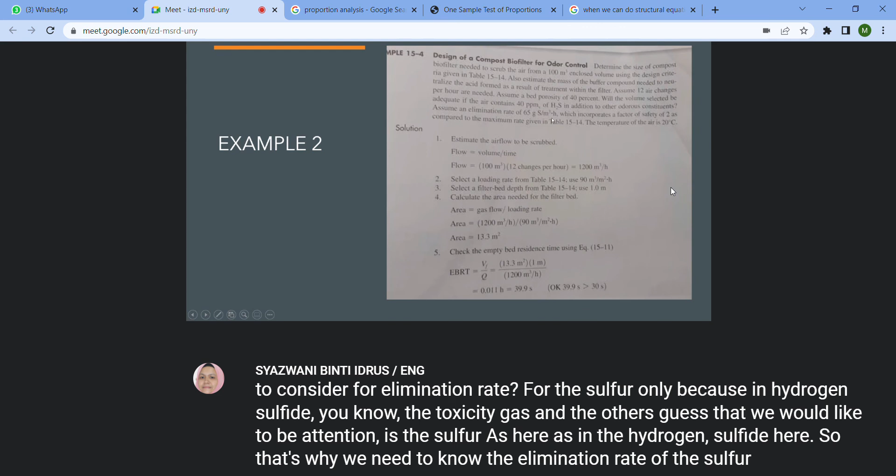Assume an elimination rate for the sulfur. Why do we have to consider the elimination rate for the sulfur only? Because in hydrogen sulfide, the toxic and odorous gas that we would like to pay attention to is the sulfur, the S in the hydrogen sulfide. So that's why we need to know the elimination rate of the sulfur, and why it is given in the question, because it is the compound of interest, the compound that we would like to remove.

Okay, all right. Estimate the airflow to be scrubbed: volume divided by time. So the volume given, times the number of air changes. In this case, assume 12 air changes per hour needed. So 100 times 12, we get the flow equal to 1,200 meter cube per hour.

Okay. Then number 2, select a loading rate from table 15.14. How to select the loading rate in this table? Very easy, because our interest is only the hydrogen sulfide. So you go straight to the hydrogen sulfide and select the loading rate. The loading rate is about 90.

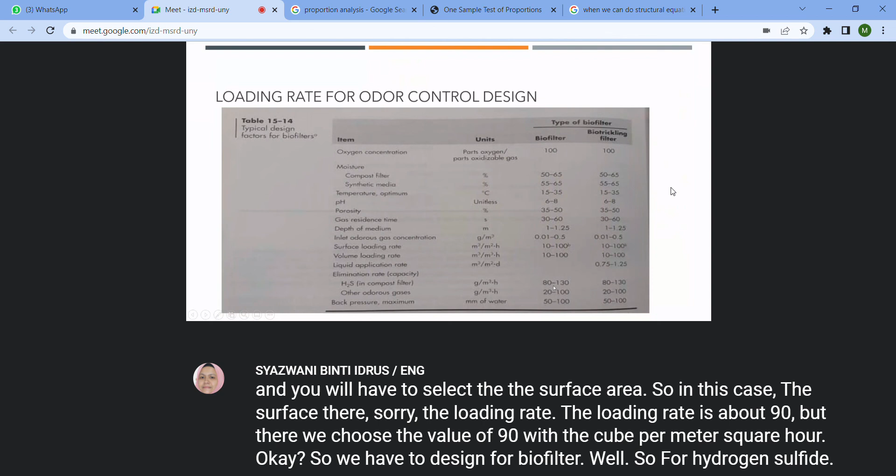We choose the value of 90 meter cube per meter squared hour. So we have to design for biofilter. For hydrogen sulfide, if biofilter, you have to use any value from 80 to 130. If you are designing for other odorous gases, you can choose any value from 20 to 100.

Okay, next, what do we do next? Select a filter bed depth from table 15.14, use 1 meter. Filter bed depth also to be selected from this table. The depth of the medium is given, range is from 1 to 1.25.

Select as 1. Then calculate the area needed for the filter bed. Area is equal to gas flow divided by the loading rate. Gas flow calculated earlier, the loading rate from the table, so we get the area.

Okay, so check the empty bed residence time. Empty bed residence time is equal to volume of the filter divided by Q.

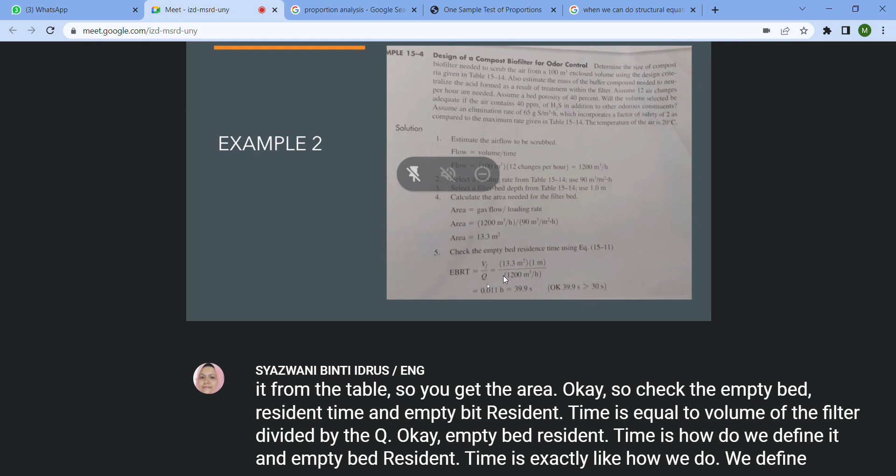Empty bed residence time is defined exactly like how we define empty bed contact time. But empty bed contact time, the term is normally used whenever we design for a column filtration, like when we design for water treatment. But empty bed residence time, the term is used whenever we design for gas treatment. The concept is still the same: how long it takes for the gas to pass through the filter media. Same goes for empty bed contact time.

So in this case, empty bed residence time is equal to volume divided by Q. The volume is 13.3 times 1, where 13.3 is the area times 1 for the depth. So you will get the EBRT. In this case, EBRT is 39.9. As long as it's bigger than 30 seconds, it's acceptable.

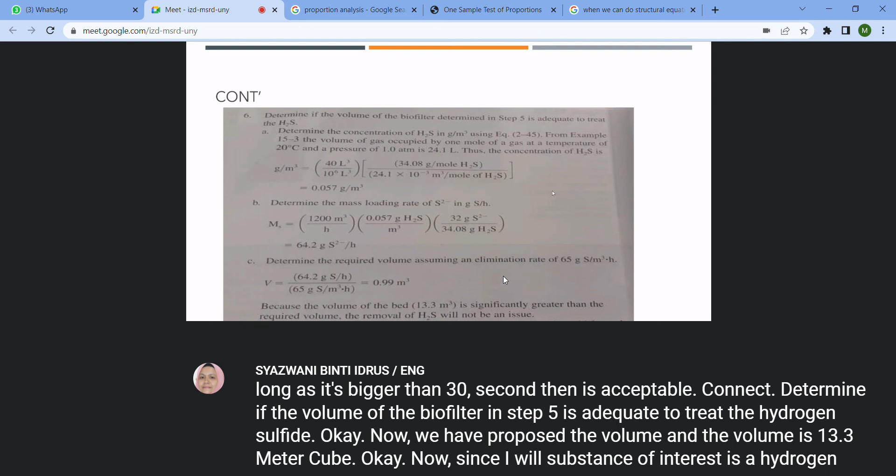Next, determine if the volume of the biofilter in step 5 is adequate to treat the hydrogen sulfide. Now we have proposed the volume, which is 13.3 meter cube. Since our substance of interest is hydrogen sulfide, we need to check whether the volume we have provided for our filter is sufficient to treat the hydrogen sulfide. This is the reason we need to conduct this calculation.

Determine the concentration of hydrogen sulfide using the previous calculation. From example 15.3, the volume of gas occupied by 1 mole at 20 degrees Celsius is equal to 24.1, which we calculated earlier. Thus, the concentration of hydrogen sulfide in ppm is given as 40 in this question. You follow exactly the same steps, using the molecular weight for hydrogen sulfide and the volume of gas occupied at 20 degrees Celsius. You will get the concentration of hydrogen sulfide in gram per meter cube equal to 0.057.

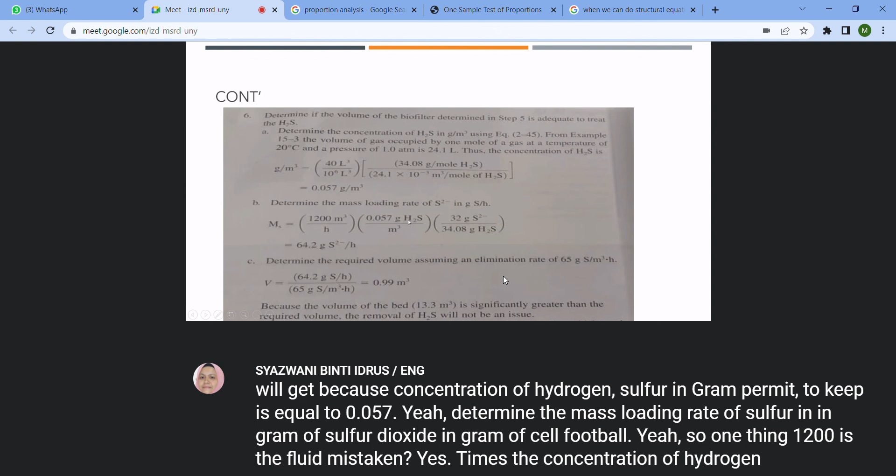Determine the mass loading rate of sulfur in gram of sulfur per hour. 1,200 is the flow rate, times the concentration of hydrogen sulfide. These are the atomic weight for sulfur, 32, and 34.08 is the molecular weight for hydrogen sulfide. So in this case, the mass loading is equal to 64.2 gram of sulfur per hour.

Determine the required volume assuming an elimination rate of 65 gram of sulfur per meter cube per hour. The elimination rate is given because, as mentioned, sulfur is the compound of interest since we have hydrogen sulfide. So you have to refer to the elimination rate of sulfur. The mass divided by the elimination rate gives you 0.99.

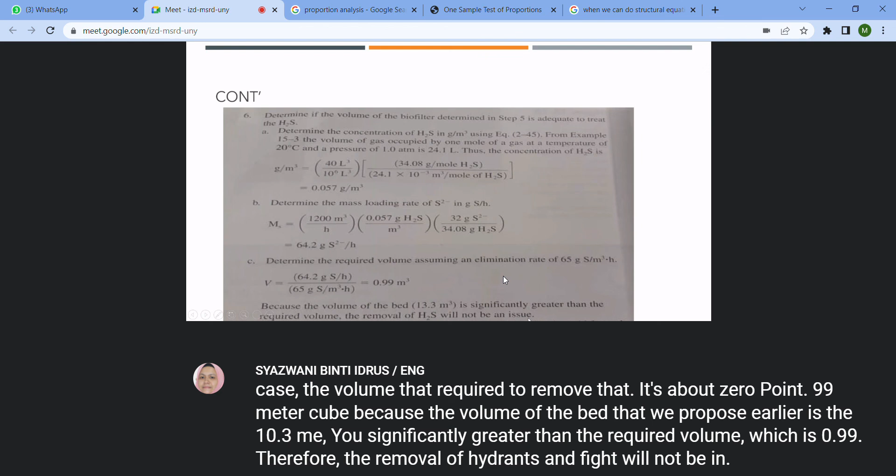This is the point where you check and decide whether the volume proposed earlier, the area and volume for the filter bed, is sufficient to remove the hydrogen sulfide. In this case, the volume required to remove the hydrogen sulfide is about 0.99 meter cube. Since the volume of the bed we proposed earlier is 13.3 meter cube, which is significantly greater than the required volume of 0.99, the removal of hydrogen sulfide will not be an issue. Okay, I think that's all.

This is table 15.14 that you are going to refer to. Basically, in this table, you need to find the depth of the media, the surface loading rate, and the type of the biofilter.

Just now we use the loading rate. We use a loading rate of 90.

We have to design the biofilter. I did mention that you have to use the loading rate in meter cube per meter square hour. So the loading rate you are to refer from the surface loading rate, meter cube.

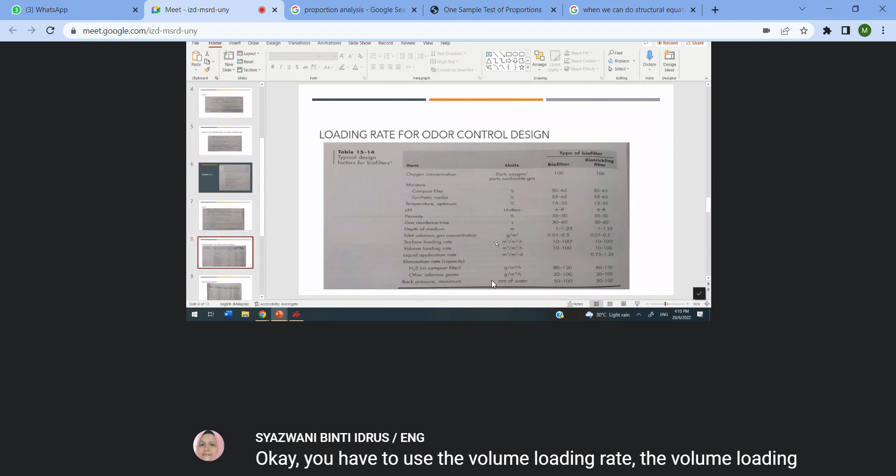Okay, you have to use the volume loading rate, in meter cube per meter cube hour. In this case, they use the value of 90, so you can use any value between 10 to 100. Just now I mentioned that you can refer between this value, which is wrong.

In this case, you have to use the surface volume loading rate, not surface loading rate, because you are comparing the volume provided. So you have to always refer to the volume loading rate.

The elimination rate just now in the question is given as 65 for hydrogen sulfide, but I can see that it doesn't fall within the range. You are given 65 gram per meter cube hour.

In this case, for the biofilter, it is 80 to 130 for hydrogen sulfide. For other odorous gas it's between 20 to 100. So these are the elimination rates for hydrogen sulfide and other odorous gas including ammonia.

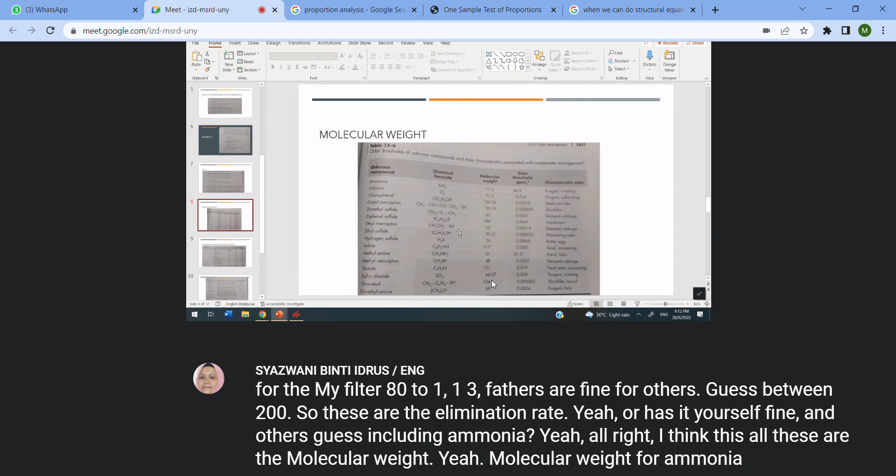These are the molecular weights, for ammonia. Basically you can calculate this from the periodic table. Ammonia, hydrogen sulfide, and sulfur dioxide is 64. The hydrogen sulfide is 34. Ammonia is 17.

Okay, the last point is where in the wastewater treatment plant it produces the odorous gas. Most of them during the sludge treatment, the major one.

I think, any questions? No.